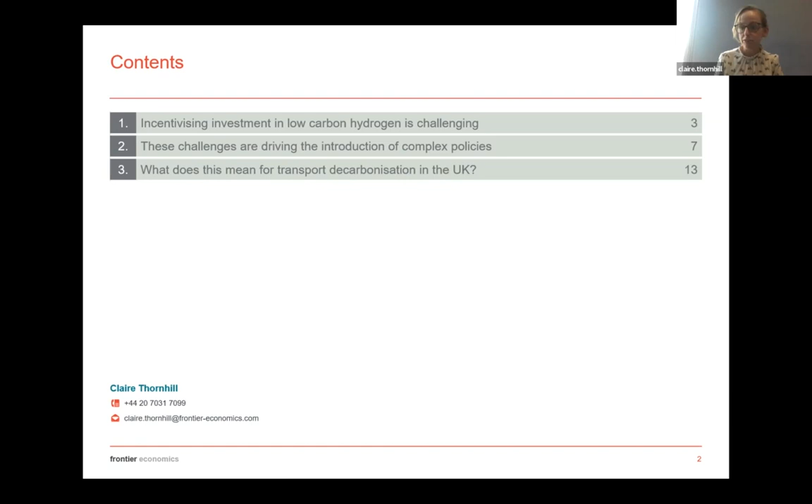So let's start with the ambitions. There are huge ambitions to deliver a low carbon hydrogen economy in the UK and in the EU. In the UK, there's a 2025 target to get a gigawatt of electrolytic hydrogen in place. And by 2030, there previously was a 5 gigawatt low carbon hydrogen target, but the recent British Energy Security Strategy doubles that to 10 gigawatts and also specifies that 5 gigawatts of this should be electrolytic hydrogen. And obviously this British Energy Security Strategy was written in the context of the current gas price crisis, which probably informs the emphasis change to electrolytic hydrogen.

And beyond 2030, there is an aim for large-scale deployment of hydrogen to reach all hard-to-decarbonise sectors. One thing I should mention, there's a big uncertainty in the UK around the role of hydrogen for heating in homes. That's something that we're working for BEIS on at the moment. So BEIS has a huge programme of research and technical research going on at present to inform a decision in 2026 about whether or the extent to which hydrogen makes sense as a low carbon fuel for heating buildings. But there is a really strong consensus that hydrogen will be required in certain sectors like heavy industry.

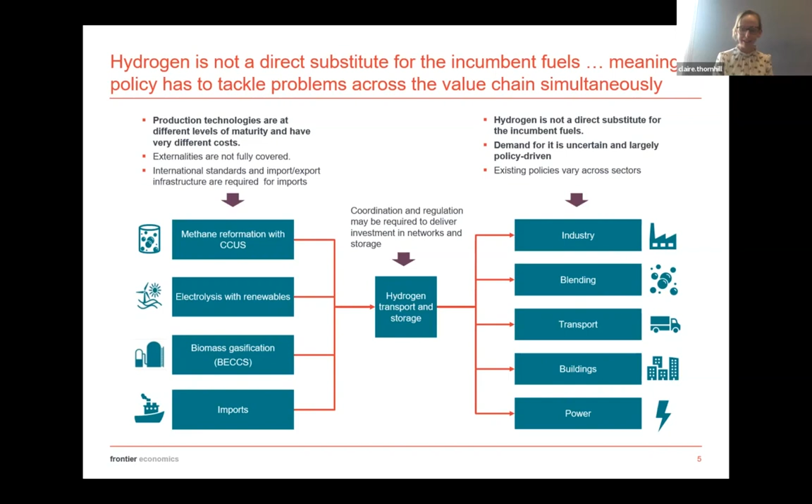So what does that mean? It means that generally when economists think about trying to get a low carbon energy market in place, we will start off with thinking about what the efficient end state would be. And here we would think, looking at the right, that we would have a market where there are no subsidies and the only intervention is to internalize externalities, for example, with the carbon price. But we're so far away from that at present. There's a lot more barriers and market failures in place.

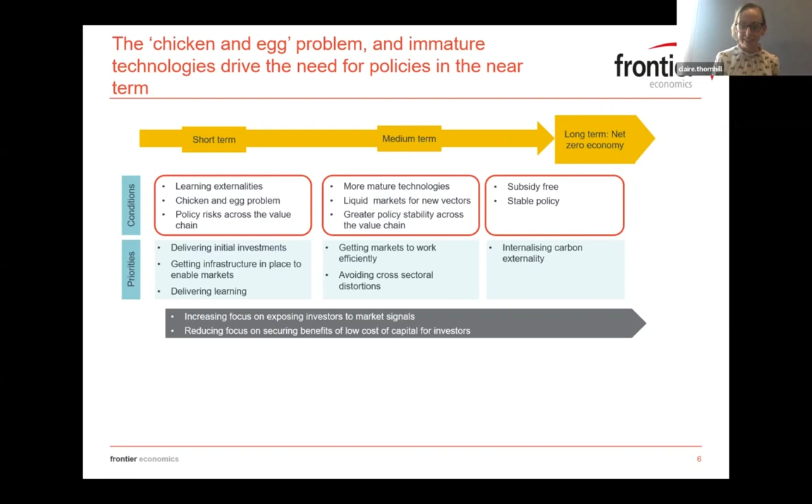So in the short term, we're in a world where there's learning externalities, there's the chicken and egg problem that I mentioned, there's policy risks across the value chain. Therefore, the priority has been in developing policies in getting initial investments off the ground, getting infrastructure in place to enable the markets and delivering learning. And that means, as we'll go on to talk about, that policies have tended to be complex and also slightly imperfect in places. And I think there's learning on the policy making side as well as in other areas of the market. So these challenges are driving the introduction of complex policies.

So looking just at three countries, as I mentioned, the UK, Germany, and the Netherlands, what we have seen is that unlike in the world of renewable electricity, where a sort of broad consensus around production subsidies has emerged, there isn't yet a consensus in Europe on the best instruments to incentivize low carbon hydrogen beyond R&D funding, which all countries are engaged in. And that means that not only are there very different subsidies across countries, there's actually a mix of subsidies within countries. And I think that reflects this multiplicity of market failures and barriers that are in place. It's very hard to design one all singing, all dancing policy that corrects for all of those.

So on the production subsidy side, the UK has announced a variable subsidy, which is originally aimed at delivering large-scale production of hydrogen for industry, and also a capital grant scheme, which is initially focused on electrolytic projects. And I'll go on to talk a bit more about both of those in a moment. The Netherlands has introduced a carbon CFD scheme. So that is a top-up payment against the carbon price, so that investors have certainty over the revenue that they can potentially receive in the carbon market. And the Netherlands also has investment support for electrolyzers.

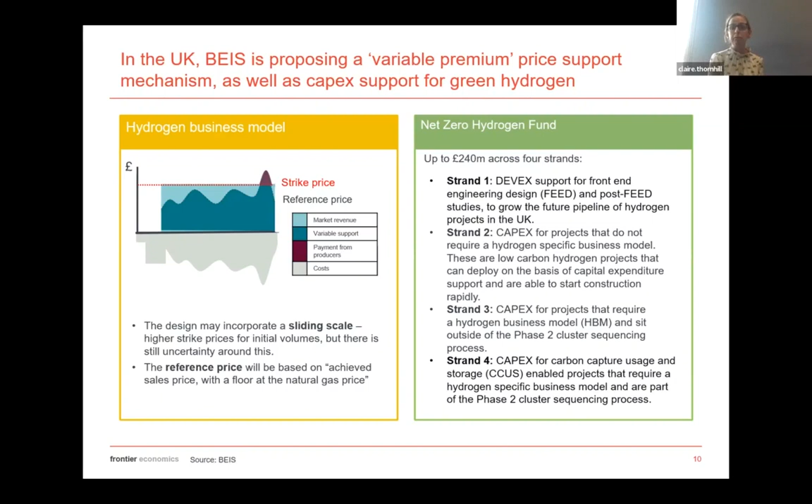So I mentioned also the renewable transport fuel obligation. That also, in theory, incentivizes hydrogen. The RTFO is a tradable obligation scheme, and hydrogen produced by electrolysis using renewable electricity or from biohydrogen can receive support from this scheme. Basically the obligation applies to suppliers of fuels to transport, including maritime and rail now.

And there are two parts to the obligation, and one of the parts relates to development fuels, and hydrogen is one of the fuels that's allowed to meet that obligation. But actually, looking at the 2022 renewable fuel statistics that have been published to date, it seems that no hydrogen so far has been used to meet those development fuel obligations. It has mainly been fuels derived from waste that have been used to meet that part of the obligation.

So why has the RTFO been slow to incentivize hydrogen so far? One is the point that I mentioned previously, that the RTFO is an obligation scheme. Investors have often pointed out that these obligations are hard to bank against, given the risk that governments will change the parameters, change the size of the obligation, change the buyout price, and so forth. And in fact, that's something that we've seen quite recently.

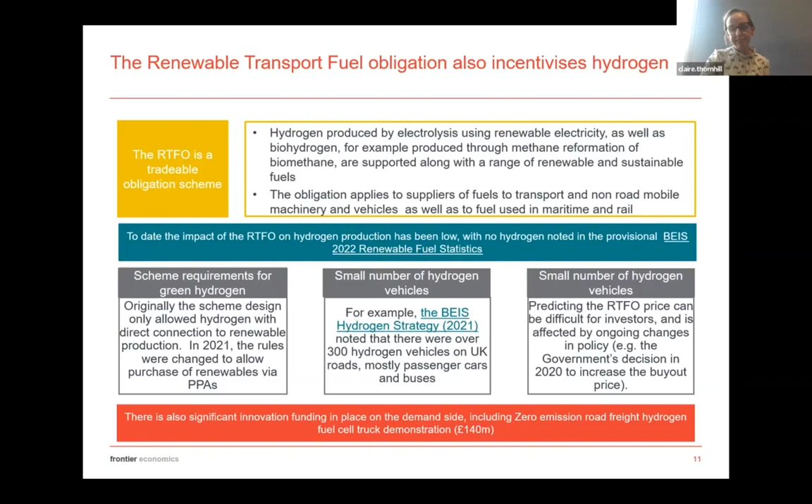So worth also mentioning that there's innovation funding in place on the demand side in the transport sector in the UK. Just to mention on the import side, I touched on this earlier, but there's some really interesting developments in Germany on imports. Germany envisages that the majority of its hydrogen will come from imports. Germany is focused on green hydrogen and has set up something called H2 Global. This is basically an organization that will buy and sell imported low carbon gas, and there will be a kind of CFD approach where the difference between the supply prices and the demand prices will be compensated by grants from the German government.

And this is quite exciting, I think, because there's a really strong green hydrogen production potential in countries with great renewables. So people talk about Morocco, Chile, places like that. It will be interesting to see what H2 Global does to that market.

So just to circle back and conclude, what does all of this mean for transport decarbonisation in the UK? Worth saying that BEIS expect transport to be a major user of hydrogen. The idea is that in the 2020s, before the refueling network is up and running, the main focus will be on depot-based transport, which could include buses. In the 2030s, there could be an expansion to HGVs, buses and rail, and also the potential for use in commercial shipping and aviation. And then, of course, there's just huge uncertainty about what happens in the long term. But there are still many open questions around this.

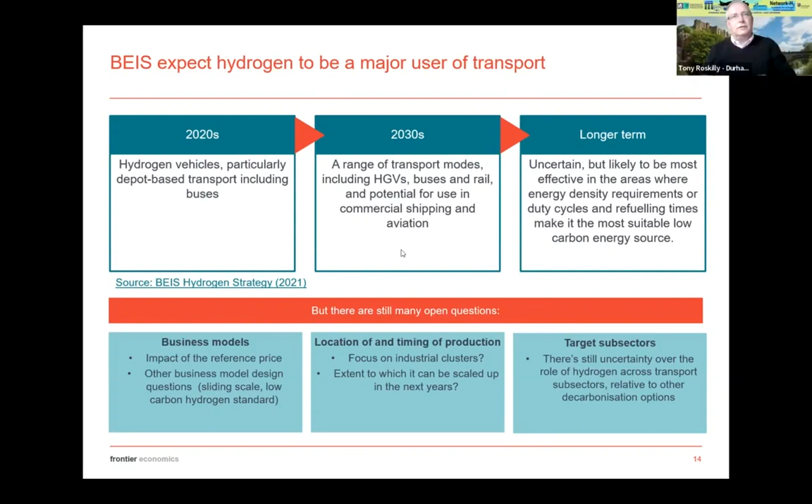Our next presentation is on a business model design for hydrogen refueling stations, a multi-level game approach. Tian Zhao is from Copenhagen Business School. He's a PhD candidate. Previously to his studies here on energy economics and policy he was at Beihang University in China. He has already published a number of papers on the economic and policy impacts of climate change, specializing in the application of game theory. Over to you, Tian.

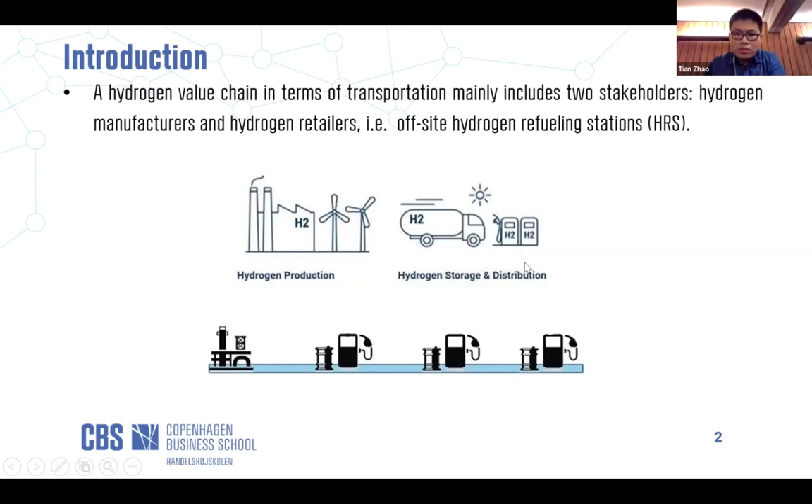The background is a hydrogen value chain in terms of transportation, which mainly includes two stakeholders: the hydrogen manufacturer, either the centralized hydrogen production plant or decentralized on-site hydrogen refueling stations, and the other stakeholder is hydrogen retailers, that is off-site hydrogen refueling stations. After the hydrogen is produced, it will be transported to the demand side, the off-site hydrogen filling station, through trucks or through pipelines.

But we have two questions about this value chain, because there are two major actors, the hydrogen manufacturer and the hydrogen retailer. They can choose to operate their business separately, or they can choose to run their business jointly. So the first question is which business model is better to generate more profits for them? For the first question, we use the Stackelberg game and the cooperative game to respectively calculate their profits in the case of the separate operation business model and the joint operation business model. After the calculation, we can compare their profits and find that if they choose joint operation as a coalition, they can get more profits than with separate operation.

The second question is, if we have shown the joint operation business model is better, how to make the two actors really adopt this kind of strategy? Because joint operation will cause a kind of coordination cost, such as they need to make an agreement, they need to design a contract. It will cost communication cost, negotiation cost. So in terms of this cost, the two actors may hesitate to choose the optimal business model of joint operation. So the second question is how to promote this kind of business model being adopted.

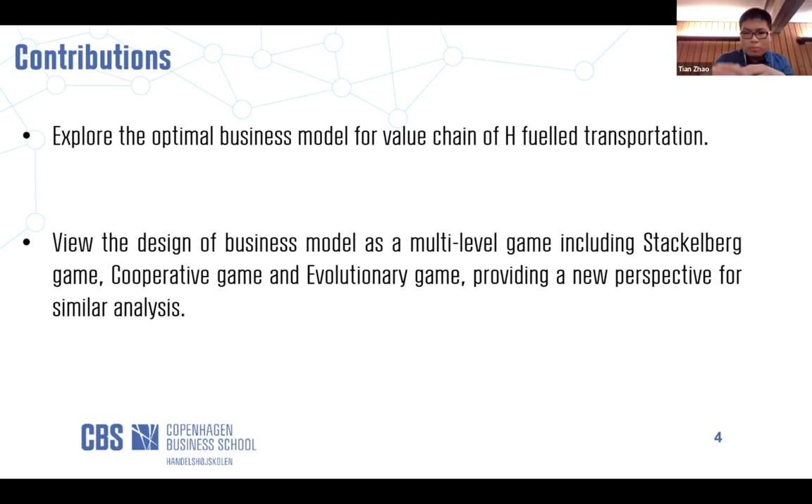So there are two major contributions. The first one is that we try to explore the optimal business model for the value chain of hydrogen fueled transportation. And the second one is we view the design of business model as a multi-level game, including Stackelberg game, cooperative game, and evolutionary game, providing a new perspective for similar analysis. Because previous research only used a one-level game or two-level game, but in our paper, we not only study how to find the optimal business model, but also how to make this optimal business model be adopted by the actors.

So we give some basic assumptions. We assume there are two major actors: one hydrogen manufacturer and one retailer, that is a hydrogen refueling station. The parameters used in this model are shown as follows. P is the retail price that consumers pay to the hydrogen refueling station. W is the wholesale price that the hydrogen refueling station pays to the hydrogen manufacturer. C is the production cost of hydrogen per kilogram. And Q is the demand of hydrogen from consumers.

And we also assume a linear demand curve, that is Q = A - BP, where A and B are constants. And as for the profit functions, if the two actors choose separate operation, they will get their maximum profits individually. So for the hydrogen manufacturer, its profit function is the wholesale price minus the cost of hydrogen production.

The first part means profit margin per kilogram, and we multiply the profit margin times Q, that is the total profit for the hydrogen manufacturer. For the hydrogen retailer, the hydrogen filling station, the P is the retail price. The retail price minus the wholesale price it should pay is the profit margin for the retailer, and we multiply the profit margin by its demand, and we get total profits for the hydrogen retailer.

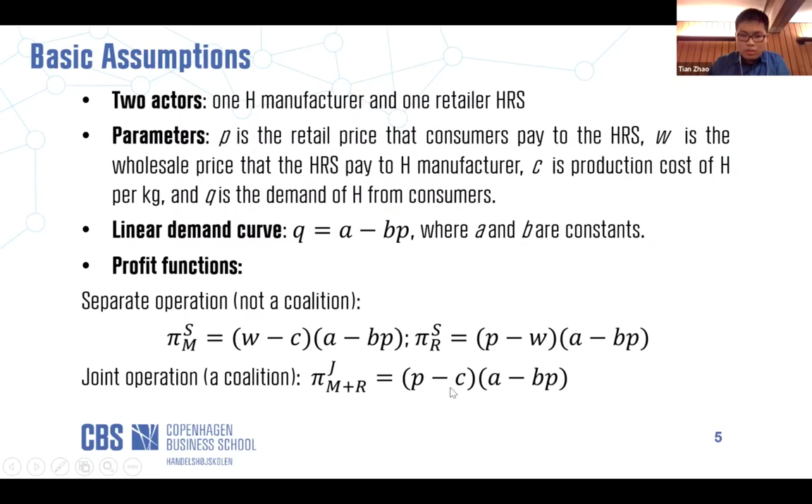And if they choose the business model of joint operation as a coalition, they will get a collective profit function. That is the retail price minus the cost of hydrogen times the demand. So we start the game with the business model of separate operation with the Stackelberg game.

Under this business model, the hydrogen manufacturer supplies hydrogen to a hydrogen refilling station as the leader because it determines its wholesale price first, and the hydrogen refilling station obtains the hydrogen and retails the hydrogen to consumers as a follower because it sets its retail price after observing the price set by the manufacturer.

The reason why we use the Stackelberg game for this case is because the Stackelberg game is a sequential leader-follower game in which the leader moves first and the follower moves after. They can decide their quantity or price, and they also maximize their own profits with no cooperation between them. So we use backward induction to solve this game, to obtain their respective maximum profits. And the profit maximization arises when the first-order derivative of profit functions with respect to price is zero.

Here we rewrite the profit function for the hydrogen manufacturer and hydrogen retailer again, because this is called backward induction. So we first calculate the first-order partial derivative of price in equation 2 and let this derivative be 0, and we get equation 3. And then for equation 1, we let the first-order partial derivative of the wholesale price be 0, and we get equation 4. So we combine equations 1 to 4, and with some easy calculations, we can finally get the maximum profits for the hydrogen manufacturer and hydrogen retailer, respectively, which are shown in equation 5 and equation 6.

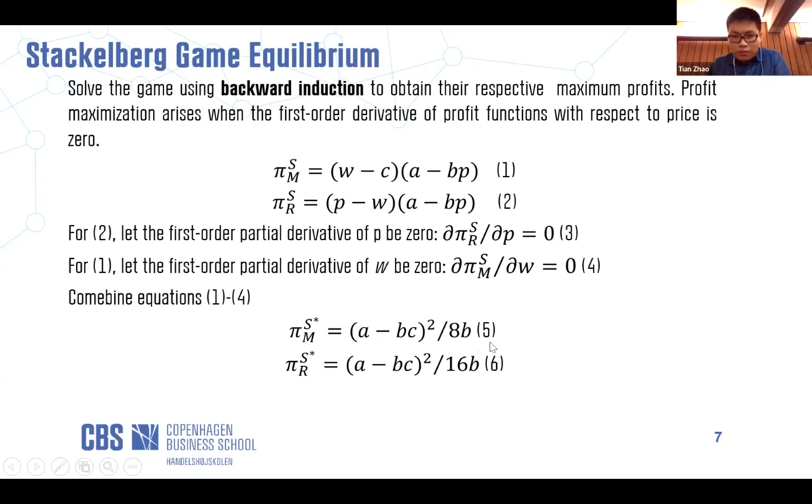And now we move on to the second game to study the joint operation business model with a cooperative game. In the case of the business model of joint operation, the hydrogen manufacturer and the hydrogen retailer are one coalition. They pursue the maximization of their collective profit. And we rewrite the profit function under the business model of joint operation again here. That is, we use the profit margin times the demand.

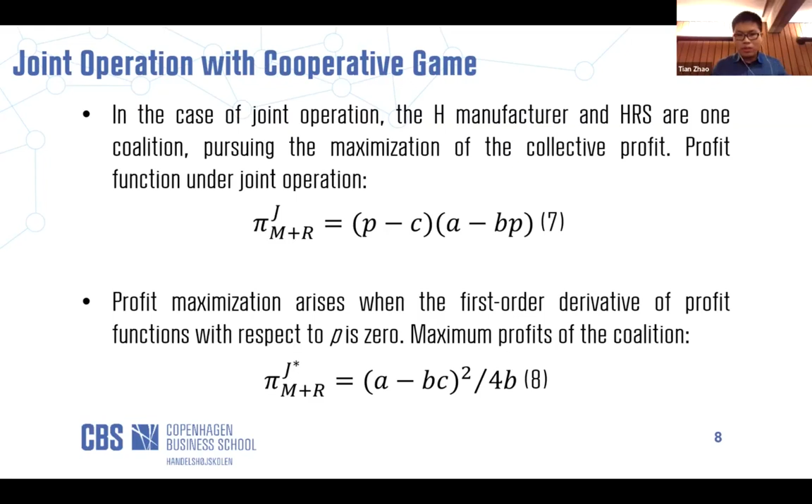Likewise, the profit maximization arises when the first-order derivative of the profit function with respect to price in equation 7 is zero, and we can also easily find the maximum profits of the coalition. That is shown in equation 8. Now we get the total collective profit for this coalition. Now, for the business model of joint operation, the members of the coalition can sign an agreement or a contract for allocation of this maximum collective profit between themselves.

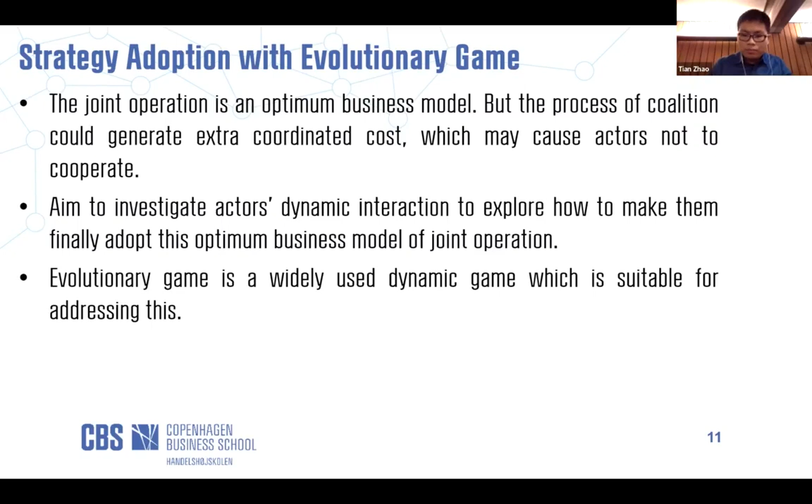So to solve this evolutionary game, we use the replicator dynamics. Because the time is limited, I will skip the details about how to solve this equilibrium. Finally, we can get two equilibriums. These two actors will both choose the business model of separate operation, or they will both choose the business model of joint operation. So this equilibrium of joint operation is the ideal equilibrium we want to get. So how to make this dynamic game converge to this ideal equilibrium?

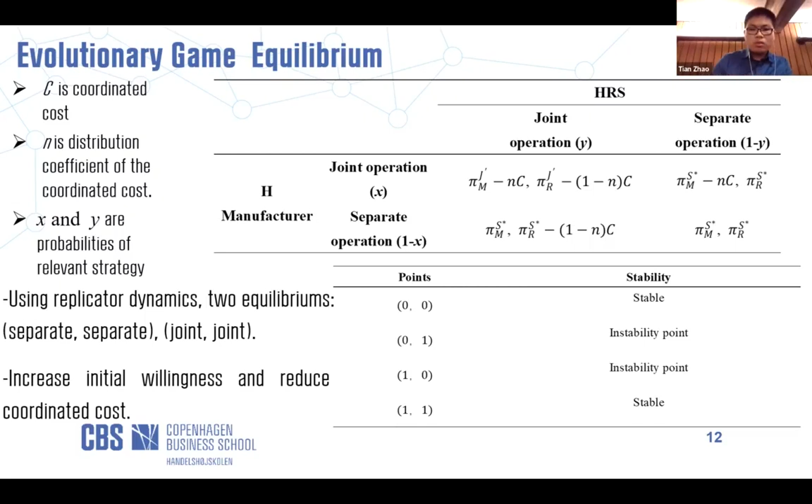So we move on to the conclusions and the outlook. In this working paper, we proposed a multi-level game framework for the design of a business model of hydrogen refueled transportation. And for the value chain of hydrogen refueled transportation, the optimal business model is the joint operation as a coalition compared with the separate operation as individuals. If we can decrease the coordinated cost, and if we can increase the initial willingness of operating jointly, we can lead the whole dynamic decision-making game to the ideal equilibrium.

But this working paper has some limitations for future study. The first one is we simplified the supply chain as one leader, one follower. That is, we assume there is one hydrogen manufacturer and one hydrogen filling station. But in reality, it can be one leader, that is one hydrogen manufacturer, and multiple followers with many hydrogen refilling stations. The hydrogen manufacture can be centralized or decentralized. In different scenarios, the profit function or the demand curve may be different.

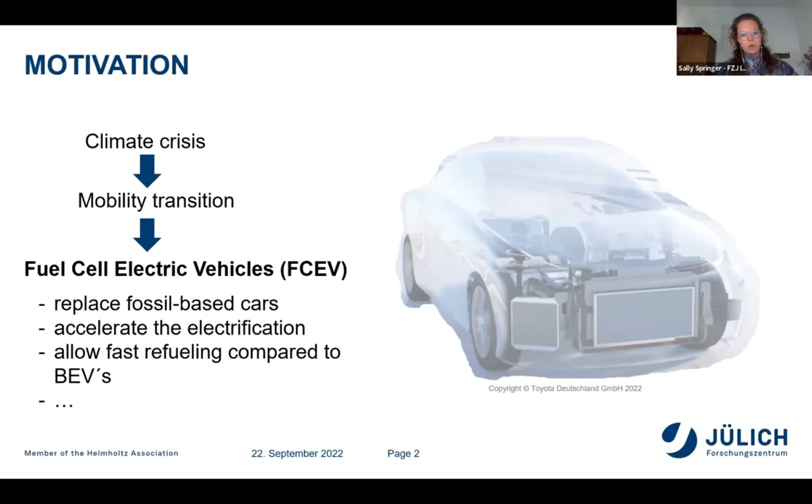But to name some of them, they can replace fossil-based cars, of course. They can accelerate electrification. They are faster in refueling, and so on. But we asked ourselves, what about the social impacts? Because these social influences and social aspects are one inherent part of sustainability, and it's really important that we don't forget about them.

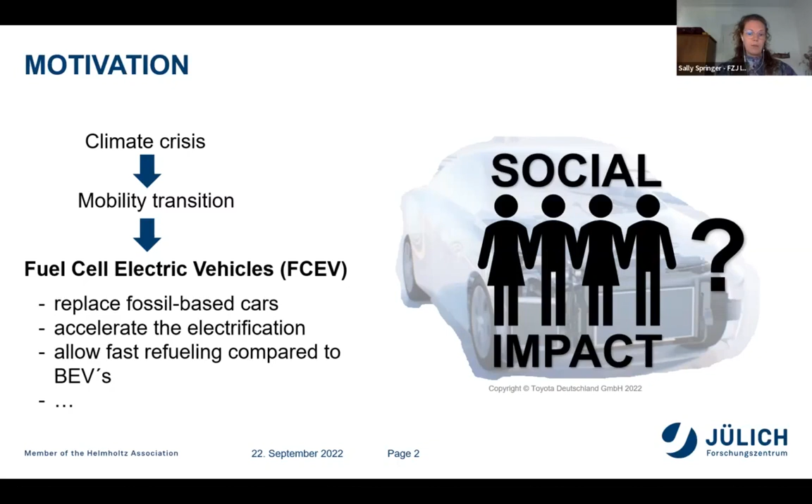So the presentation today is structured like this. In the beginning, I will provide some technical information about the fuel cell electric vehicle we looked at in our case study. And after that, I will talk about the methodology of social life cycle assessment. After that, I'm going to present the results, the social impacts, and in the end, a short summary, some limitations, and some future research needs.

Now, I've mentioned this method of social life cycle assessment, and to give you a hint about what it is, first of all, we can ask what does life cycle mean? So it's a life cycle thinking approach, and this means that the whole life cycle of, for example, a product is considered, starting with the raw material extraction from either primary or secondary sources. Then the next phase is the processing and production, which usually consists of different steps.

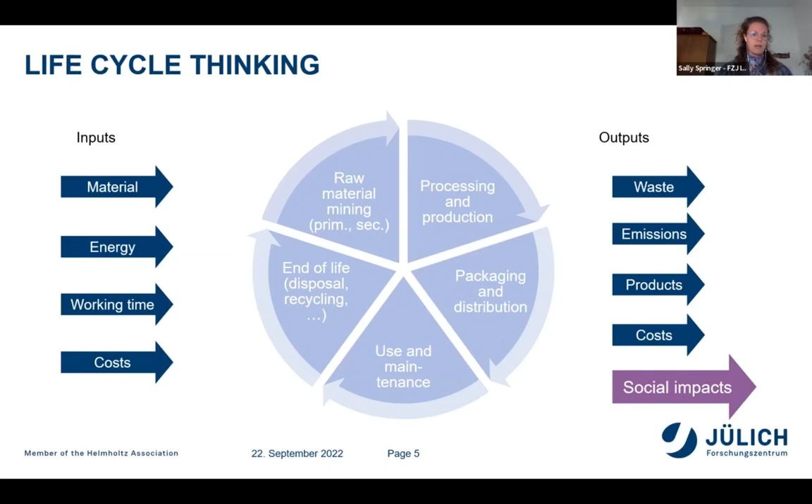And then at the same time, at every step of the life cycle, I have outputs. This is in the end, of course, my final product, but also intermediate products. But then next to them, I also have outputs like waste and emissions. I have my costs and I have social impacts on different kinds of people. So now we know what this life cycle thinking is about.

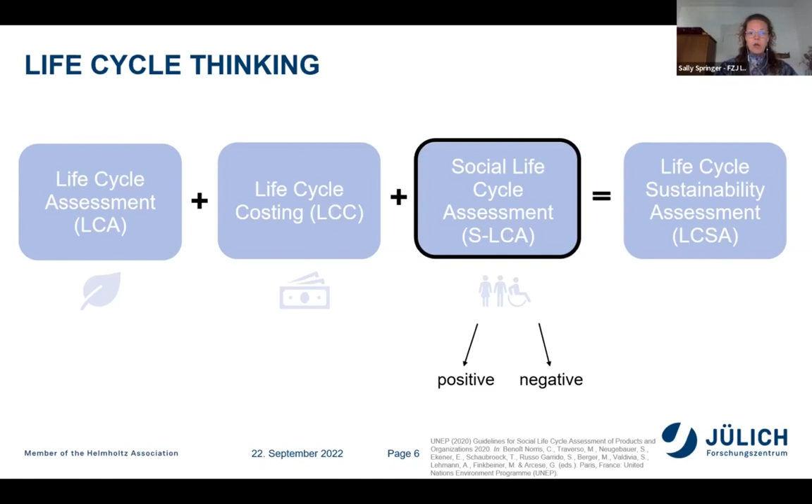And to put it in a greater context, in the end, I could always do a life cycle sustainability assessment covering all three pillars of sustainability, of which one is life cycle assessment, which addresses the environment and the ecological part. Then I have life cycle costing, addressing the economic issues. And then I have social life cycle assessment, what I looked at now, which covers all the social aspects. And these social aspects can either be positive in terms of opportunities, or they can be negative in terms of risk.

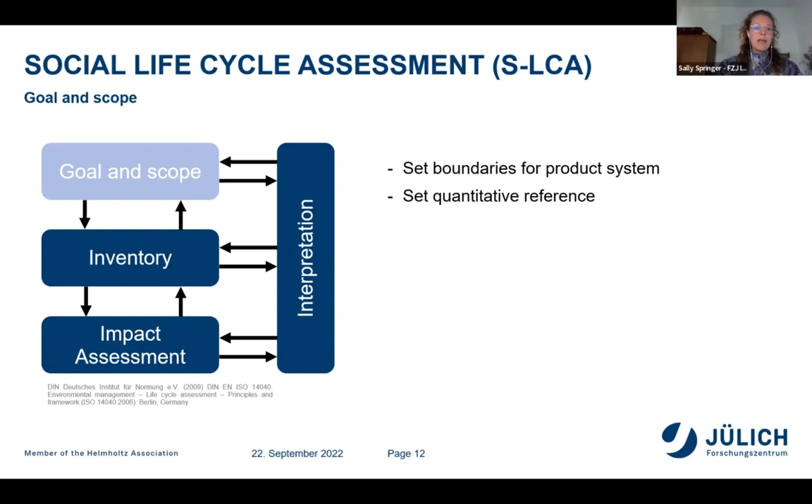Now, in the goal and scope phase, again, there are other things which have to be defined. For example, the boundaries for the product system have to be set, and you have to set a quantitative reference. This quantitative reference is called functional unit, and in this case, it is the production of a fuel cell electric vehicle with a 100 kilowatt proton exchange membrane fuel cell. So this is the reference for the whole calculation.

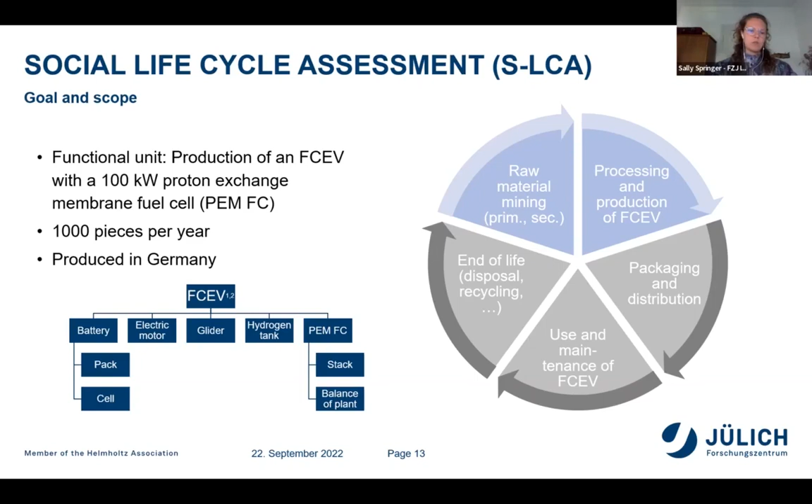And we assumed a production volume of 1,000 pieces per year, and the main manufacturing country being Germany. This means that the components, which you can see over there, are produced in Germany, but the supply chain comes from all over the world and from different countries. The life cycle stages we have considered were the raw material mining and the processing and production phase. This was mainly due to constraints on data availability.

So the next phase is the inventory in the social life cycle assessment. And this is basically all about the data. And this data can either be quantitative, semi-quantitative, or qualitative. And if it is qualitative, it has to be translated in semi-quantitative or quantitative terms in order to calculate it. And the data can either be site-specific, coming from a company, for example, or it can be generic data, and generic data is provided by different databases, and usually the data is on the level of processes, sectors, and divided into different locations, in this case, countries.

And in our specific case now, as I've mentioned before, we have used a generic database called PSILCA, and this database is built on another database, which is called EORA, and this is a global multi-regional input-output database, which actually uses economic values. So this is where the whole data came from.

Now, the next phase is the impact assessment in the methodology. And we have used a reference scale approach to calculate the results. And I will explain that on the next slide. But to stay here for a moment, in that approach, the calculation is based on risk levels and characterization factors. So for each risk level, I have this factor which serves as a weight. And in this case, the higher the risk gets, the more weight is put into the calculation.

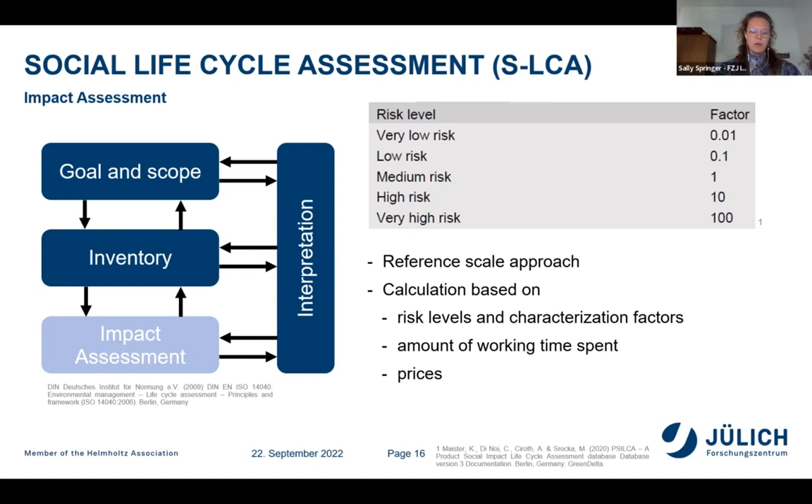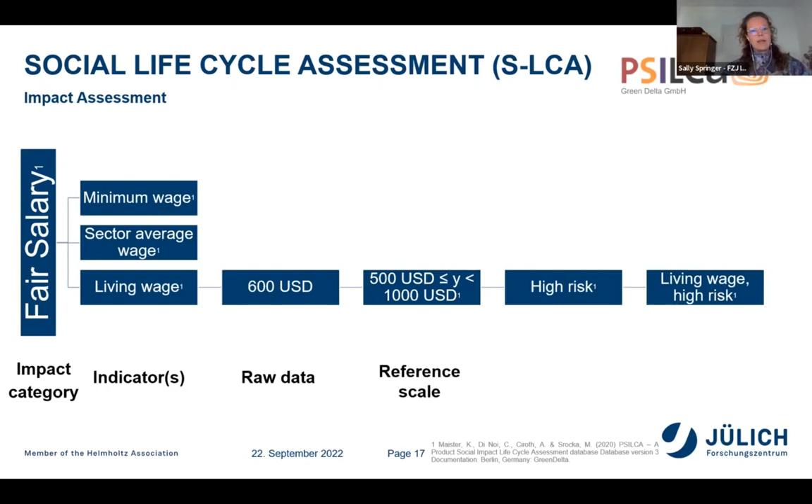Now, what is the reference scale approach and what does it mean? As I said before, we have different kinds of impact categories, for example, fair salary. And then I can have one or more indicators to measure that impact category. And for each indicator, I have raw data, for example, $600. But now I don't really know if this is a good performance or not, or if this is high or low. And this is why I can use a reference scale, for example, this one, which is provided by PSILCA as well. And now I can see that 600 has a high risk.

So this means there is a high risk of not meeting the living wage. And what I have in the end is a risk assessed indicator, which goes with that specific characterization factor, which we have seen before, into the calculation. Now the last phase, or the fourth phase, is the interpretation of the results. And this is what I'm going to do now.

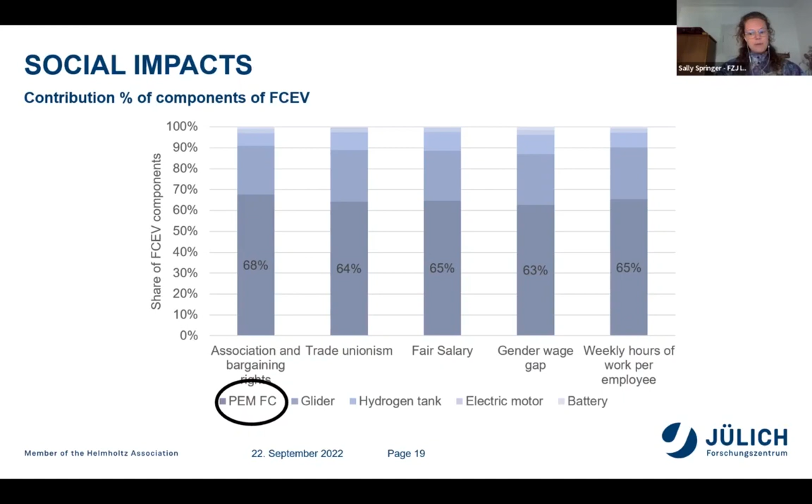So the results of our study were that if we look at the fuel cell electric vehicle as a whole, we can see now that the PEM fuel cell contributes most of the risk. And this is true for all 5 impact categories. So the highest risk stems from the PEM fuel cell. Now, with the help of that, we could identify our first hotspot here. And knowing that, we have deepened the analysis and looked at the PEM fuel cell now with a deeper look.

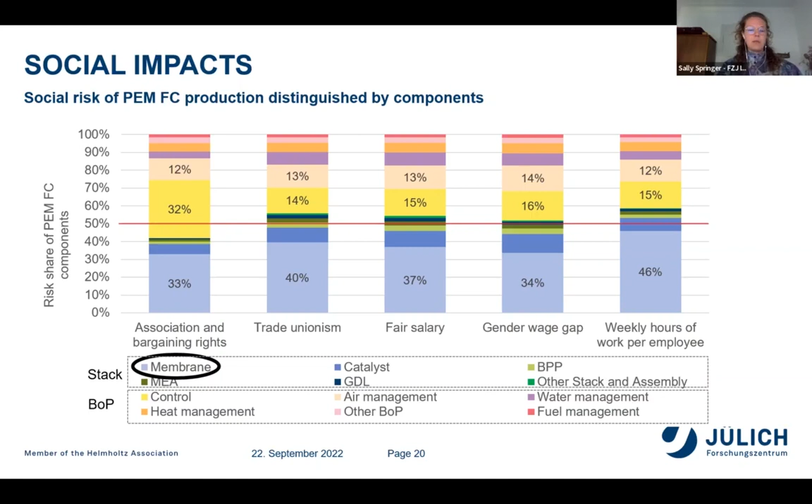And what we can also see is that the membrane accounts for the highest risk share across all impact categories. So the membrane is one major hotspot when we look at the PEM fuel cell. And what we can also see here is that the control in the balance of plant for association and bargaining rights also has a high risk share. Membrane seems to be the major hotspot.

And we can ask ourselves now why this is the case, because we are looking at working conditions, and Germany has a strong employment law and also strong law enforcement. So we now have to find out why the risk levels are so high in Germany. And I want to give you an example for that, which is fair salary. As we have seen before, we use 3 different indicators to calculate that impact category.

And one is the minimum wage, for which we have a very low risk. Because in Germany, there's this law that you have to pay the minimum wage, and companies are forced to do it. And it's not a big issue. We have a very low risk here. And then the second indicator is the sector average wage, for which we also have a very low risk, because the wage is in line with the sector average.

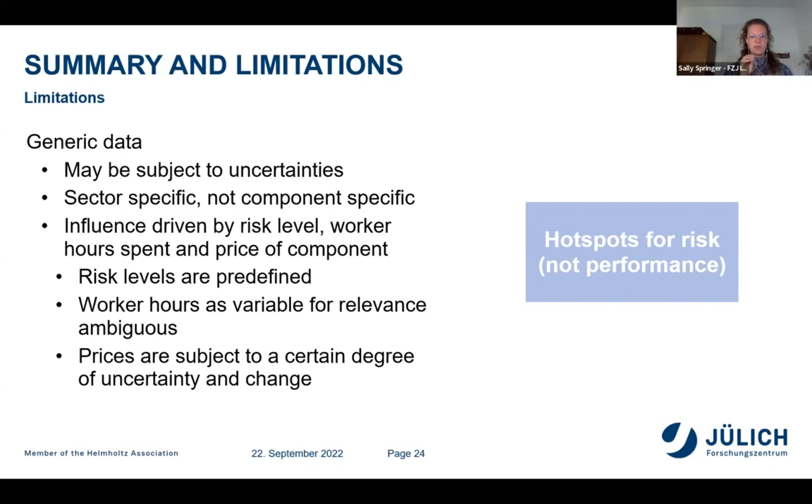And then the third point is with the prices, because they are subject to changes and also to uncertainty. So we have to keep all of that in mind. And with that knowledge, we now know that with generic data and that methodology of social life cycle assessment, we cannot measure an actual performance of a product, but we can identify hotspots for risk. And this is really important because usually the product system and products and product steps and countries and supply chains are so complex. It's a really good starting point to have these hotspots now and to gain deeper knowledge about them. And this is what we did here.

With the help of that methodology, we know now that for a fuel cell electric vehicle, the PEM fuel cell is one major hotspot. And inside the fuel cell, we have the membrane and also the control, which are hotspot components. What we also know now is that Germany is a major hotspot here for 3 out of 5 impact categories, and also that China bears a lot of risk for association and bargaining rights.

Now, for the future, it is really important to take these results and do broad literature research to find out more about the data quality. Where is the data coming from? How old is the data? How reliable is it? And then in a second step, look at the indicators and find out if they can really measure what I want to know. And then I have to gain knowledge about maybe special characteristics of a sector, if there is anything I need to know and understand in order to interpret the results in the right way.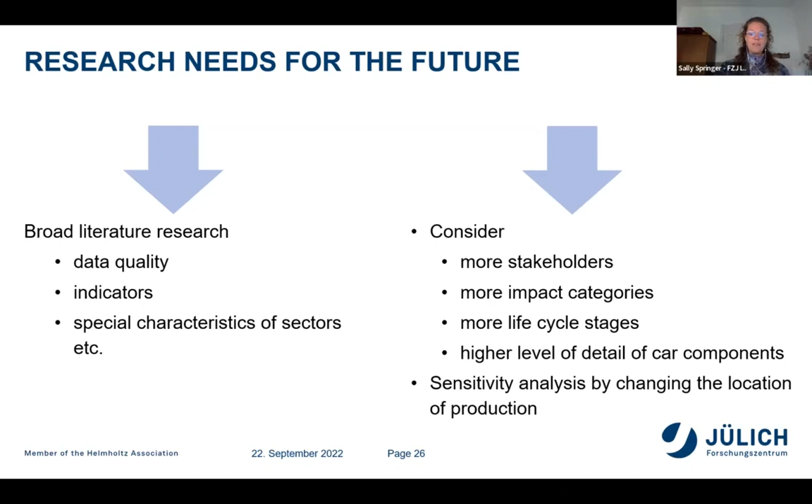And then, of course, it would be really interesting to consider even more stakeholder groups, and with that more impact categories and more life cycle stages. In this case, it would be really interesting to use site-specific data, of course. With the help of that, we could also increase the level of detail of the car components and make a deeper analysis. And then it is really important to make a sensitivity analysis in different terms, for example by changing the location of production, but also regarding the underlying data and the sectors we have chosen for the calculation. So I hope I could shed some light on the social aspects of fuel cell electric vehicles.

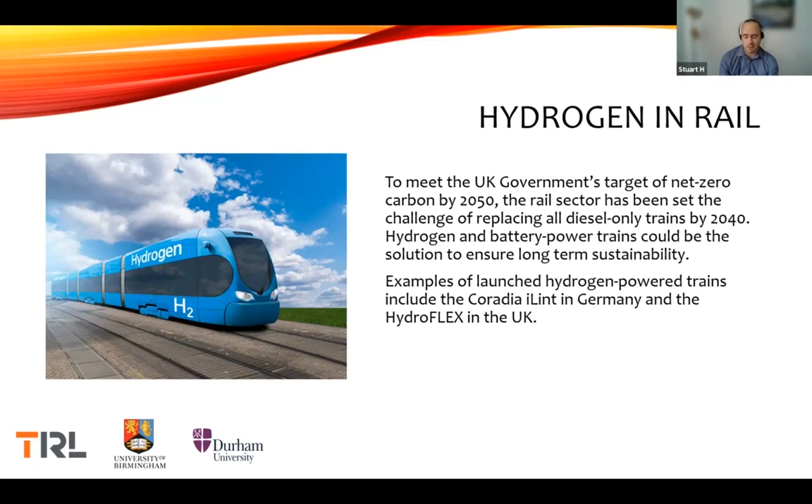So this is moving rapidly. Indeed, 4 years ago, when this event was last held, there was a lot lower interest in hydrogen. And certainly issues like decarbonisation weren't at the forefront, but that's certainly changed now, and I expect in coming years it will just accelerate even further.

So the work we've done at the university previously, this is probably what we're most famous for at the minute, is the work we've done on the Hydroflex train. So here we see an existing train that had a new traction system developed by my team in partnership with Porterbrook, and we installed a fuel cell battery system into this train. And so we did the engineering work, but also the approvals work in order to get the vehicle running onto the main line, and that's what I'm going to tell you about shortly.

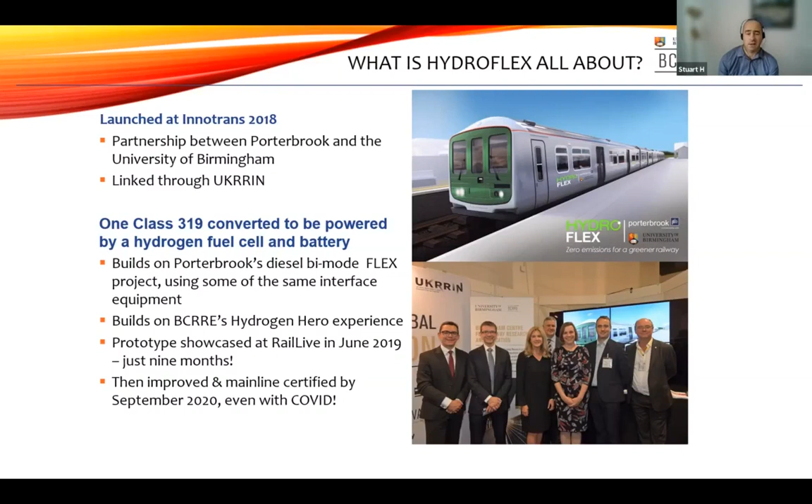So that project was launched at the last InnoTrans, which was in 2018, so pretty much four years ago. And it's a partnership between ourselves at the University and Porterbrook. It was an existing train that we took and converted it to hydrogen to demonstrate that we could do it. So I've got some slides on the Hydroflex train itself. So it was the first full-size hydrogen-powered train.

I've got full-size in brackets there because my team at the university had developed a narrow-gauge locomotive back in 2012 and showcased that. And actually, the little train that we developed back then kind of captured the imagination of the rail industry, and they realized that actually you could do this at a full scale as well. We did a lot of work on disseminating and demystifying the technology before we translated it into mainline scale.

So the work involved converting an existing train, the first ever 319 train, 319001. It had already done 2.5 million miles, so it was kind of retired, and then we unretired it and brought it back to life and converted it into a hydrogen train.

One thing to note, which is interesting about rail vehicles, is because they have such a long life, it's quite common for a vehicle to get overhauled and refreshed throughout its life. New interiors, new traction systems, new equipment, and so on and so forth. So what we're doing is not out of the ordinary. It's quite common for rail vehicles to get that massive engineering overhaul.

Another key thing is these vehicles have already got an electric traction system, so we were able to interface the fuel cell battery system into the existing DC link on the train, which made our lives a bit easier. So lots of electric rail vehicles that already exist and may be close to retirement could be good candidates to get converted to hydrogen and extend their useful life by making them an autonomous vehicle.

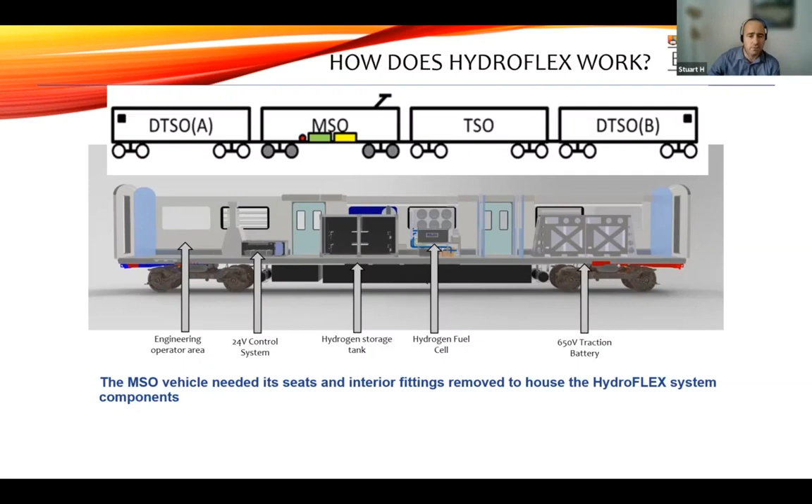So there's some pictures of the inside of the train, and this does relate to standards here. The train has been designed to meet various structural integrity standards. So here you can see we took the seats out of the train, and the seats are actually attached to the train with very strong mounting points. So the rails in the floor that the seats are attached to are very strong.

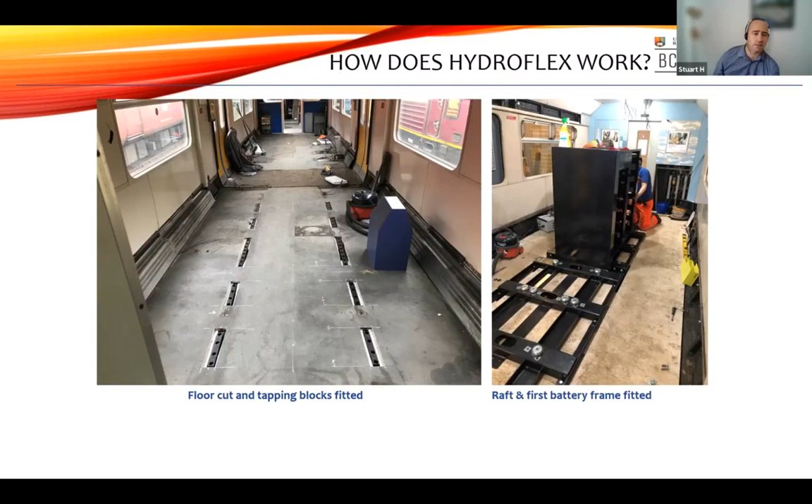Having said that, we used those fittings, but had to interface various rafts and other mechanical devices to ensure that all the equipment was attached to the train in such a way that it would meet the relevant standards. So you can see some of the frames and rafts that were created there. The tanks are 350 bar tanks, and here we designed it to EC79 standards using technology and standards adapted from the automotive sector. And here's the fuel cell.

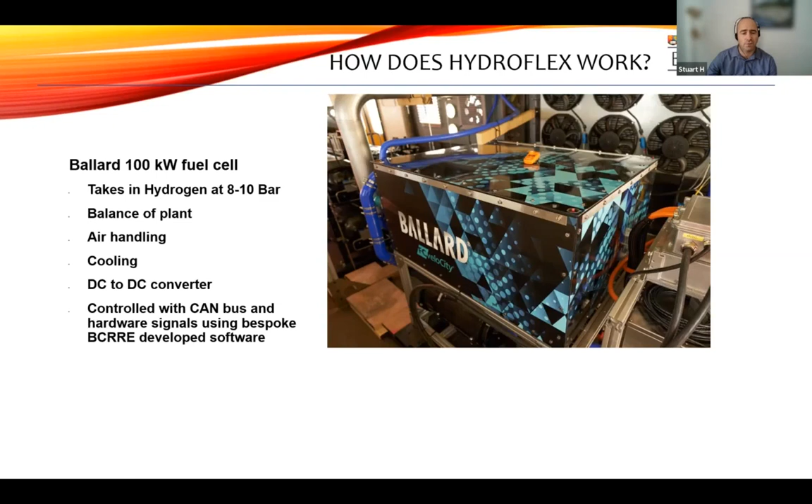So a fuel cell is just a box with hydrogen going in one end, and some balance of plant, air handling, cooling, DC to DC converter taking the electricity out of it, and controlled with CAN bus messages and some hardware signals that we wrote. We developed some electronics and software to run the fuel cell, to manage its power flow into the train system.

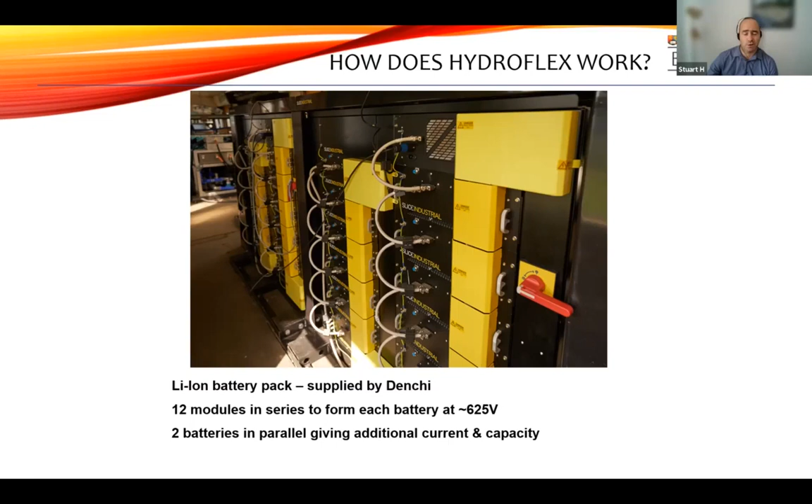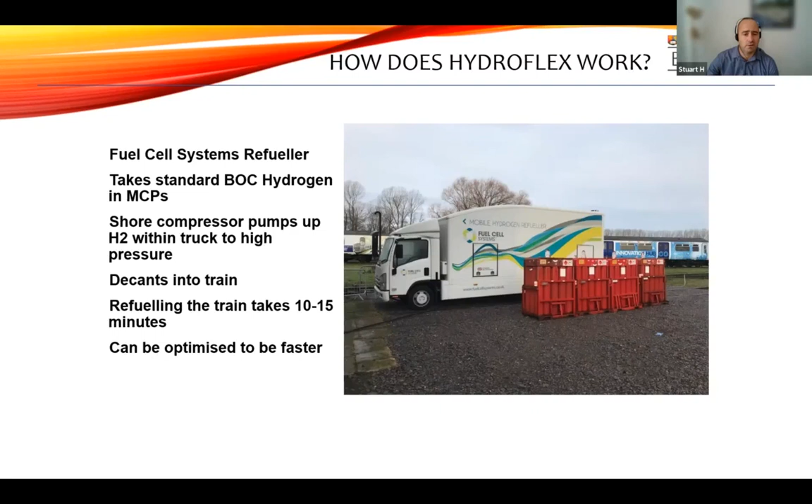So it's kind of independent then, in the sense that the dynamics of the power are all managed by the battery, and we just decide when we need to support the battery by charging it, and so on. So there's quite a lot of work gone into the architecture of this and the control system that I could tell you about.

So in terms of safety and standards, we use this thing called the Common Safety Method. It's basically a European standard for doing railway approvals, and allows you to make engineering changes to railway infrastructure and trains. We have an accredited body that does an independent assessment of it, and we also worked with the Office of Road and Rail, or Rail and Road, I never know which way around it is, who accepted our technical approach of using the Common Safety Method.

And that includes doing basic hazard identification, where you go through line by line of every single item of equipment and look at what hazards there might be, and then identify evidence to close out those hazards. So I would say actually doing the safety approvals work was harder than the engineering building the train. It took longer and was more expensive than the train engineering.

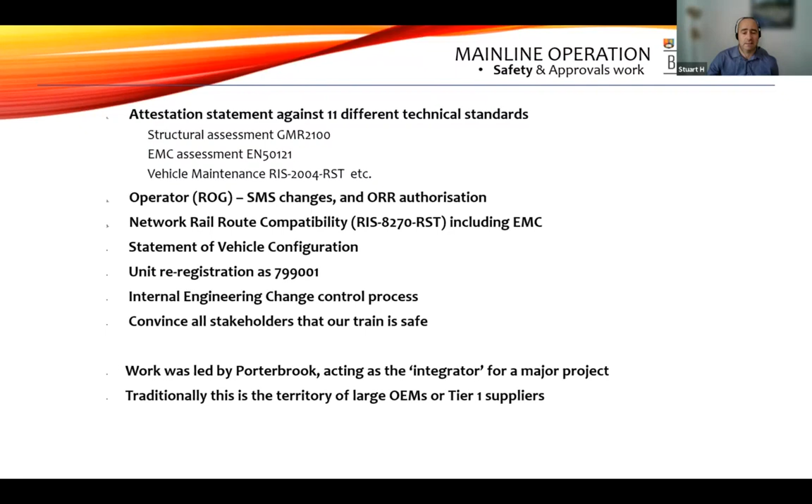So there's a huge amount of work involved in getting this onto the main line. It was led by Porterbrook because they own the vehicle, so they acted as the integrator, pulling all these pieces of work together.

Some pictures of the sort of standards that you need to comply with, electromagnetic compatibility standards for rail, and so on and so forth. So this is where we looked into this in more detail about how the existing railway standards would be affected by introduction of a fuel cell and so on. And in general, there weren't any showstoppers in terms of meeting existing railway standards with the adoption of a fuel cell propulsion system.

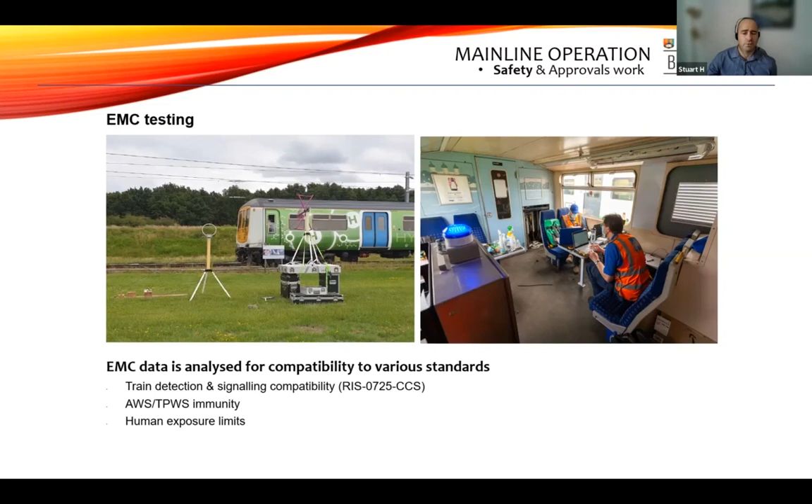So I think, as I said at the introduction, railways are advancing rapidly in terms of engineering. The standards are trying to keep up, but I'd say the engineering is happening quicker. There are standards being developed for rail specifically, but they're in draft form and proceeding at a slow pace, in my view. But that's the way standards go, I would say.

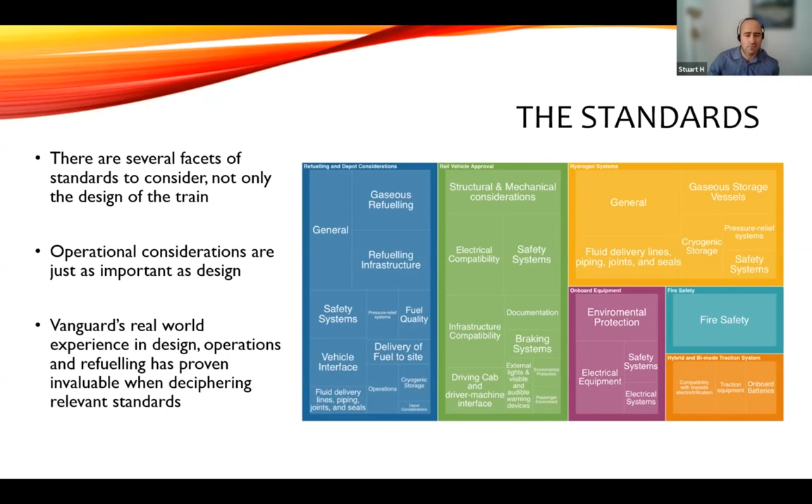As part of the work, we looked at a framework and mapping of existing standards, and we produced this standards landscape, and this is available on a website, and you can click on these buttons and then drill down into the various standards that you need to think about when you're doing fuel cell vehicles. And we're hoping to get this hosted on the Rail Safety and Standards Board's website in the future, because they were quite pleased in terms of how it could be useful for other people working in railway fuel cells to follow the method that we've used.

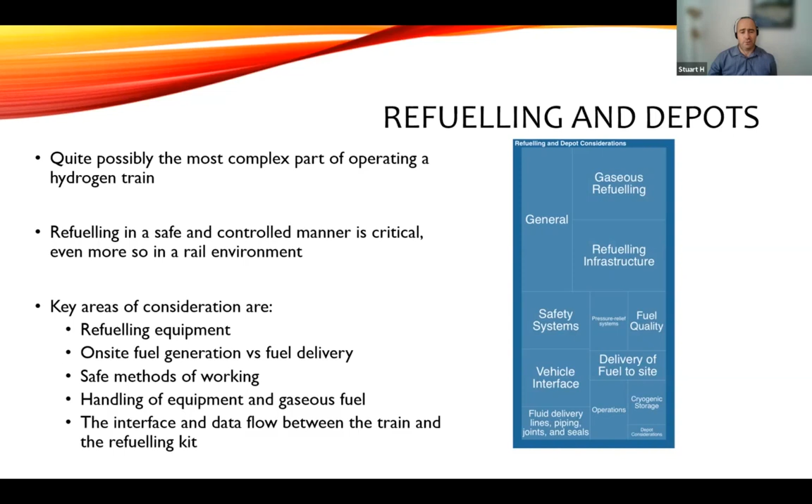And so that's broken down into things like refueling and depot arrangements, how we handle the fuel in terms of delivery, transporting it on trucks and so on, and then handling of the fuel and the interface with the train. So all these things are important. The vehicle is the thing we focused on heavily when we developed the train. So things like electromagnetic compatibility, structural integrity of the equipment, making sure that equipment can cope with the loading and vibration and acceleration environments that a train might throw at it.

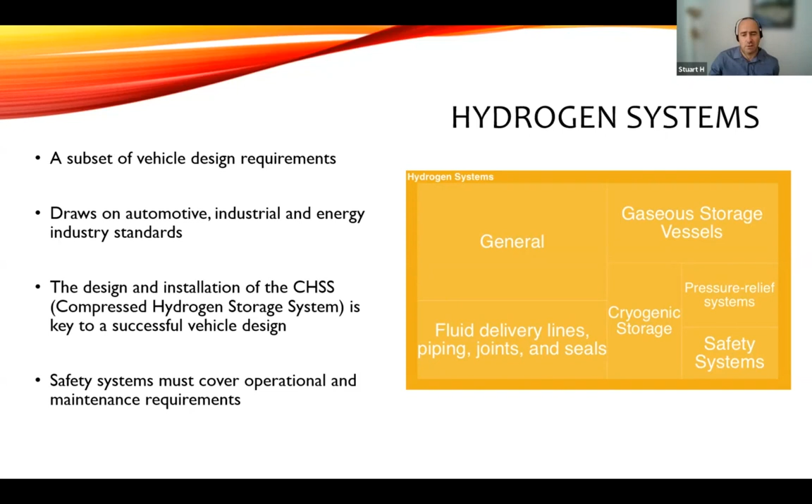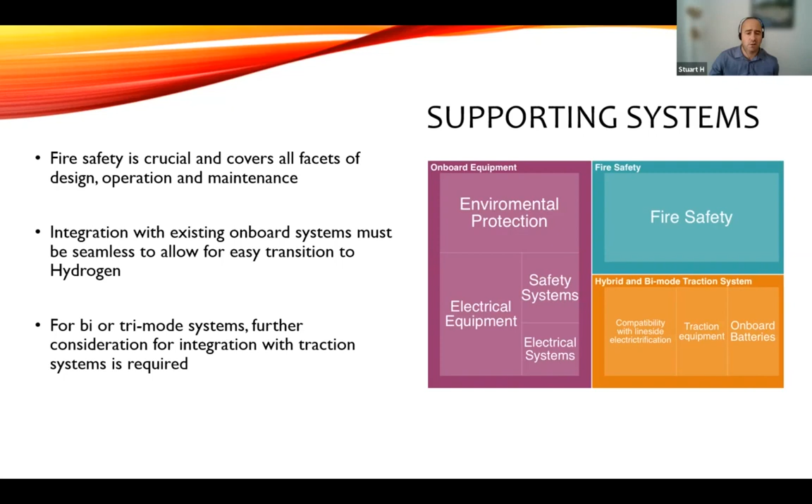And then things like hydrogen safety systems. Here we drew on automotive, industrial, and existing energy standards to install the hydrogen system in a rail environment. And then things like supporting systems, fire safety. This is a big issue. Integration with other onboard systems to allow easy transition to hydrogen, and how we integrate it with the existing propulsion system. So I just kind of had a canter through this.

I think the project was very useful because it allowed us to take a step back and look at the current understanding of hydrogen safety standards, how they've been applied to rail, and the work that we've done at the university, and also the likes of the Scottish hydrogen train, which has recently started running. They all have to go through the same pain really, to make sure we can do this safely.

I think we found out there's still some really big gaps, particularly over the infrastructure and how you manage trains, for instance, in covered environments. So taking trains through tunnels or taking them into underground stations, we really need to think about how we manage that going forward. There's an understanding of that, but I think we still need to work on understanding how we manage a rail vehicle traveling in a more enclosed environment.

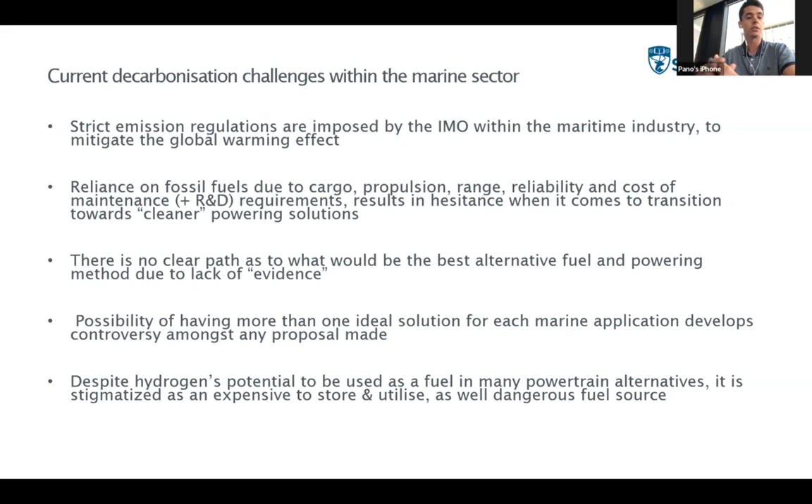And then there is also the possibility of having more than one ideal solution for each marine application, and that develops controversy amongst any proposal made. Finally, despite hydrogen's potential to be used as a fuel in many powertrain alternatives, it is stigmatized as an expensive to store and utilize fuel source, as well as quite dangerous to handle.

Consequently, the challenges that we face as a decarbonization research team are to minimize vessel emissions by eliminating their reliance on carbon-intensive sources, explore ways through which carbon could be used and traded around the world, investigate storage and utilization methods of liquid hydrogen on board vessels, compare that fuel alternative to other fueling alternatives, look into the possibility of long distance shipping with liquid hydrogen as fuel, and finally meet the clean maritime aim to become net zero by 2050.

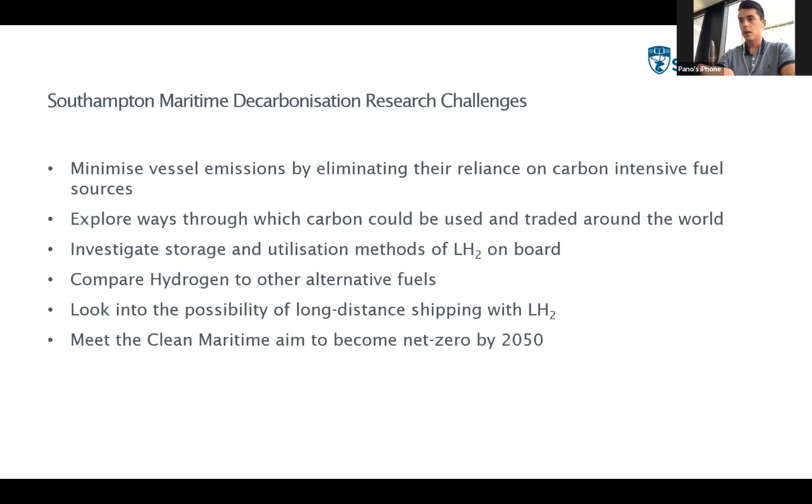Some examples of our recent work include the zero carbon baseload for large vessels and the ammonia marine-powered uncrewed surface vessel. Both projects were under the Clean Maritime demonstration competition and were funded by the Innovate UK fund. So other local projects that we carried out independently were the design of a liquid hydrogen carrier. We carried out a feasibility study of hydrogen fuel demand and distribution, with the case study being the Port of Southampton, quite local to us.

We have completed a lot of towing tank testings, fuel cell testings as well, and we've developed dynamic models of hybrid powertrains with fuel cells and batteries. So the first big project that we were involved in was the zero carbon baseload power for large ships. We've investigated the feasibility of replacing the LNG generator sets with smaller ones and adding solid oxide fuel cells to provide the hotel demand on board.

To do this, we developed a dynamic energy model, which included the fuel cell system itself, the batteries, and the generators to get the fuel consumption and emission benefits from it. Those models included the safe return to port requirements, a waste heat recovery system, and we've also examined the cold ironing alternative, which is basically a plug-in solution for vessels when they reach port. Of course, during the design process, we've looked into all of the safety requirements and risk assessments involved in undertaking such an action.

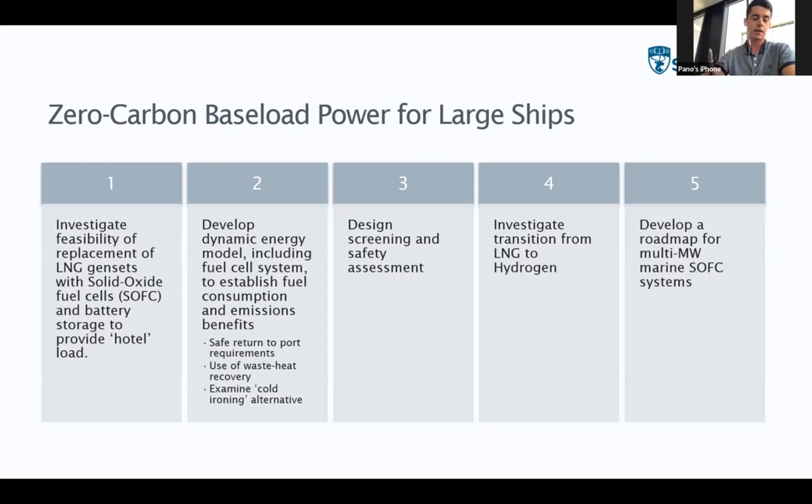More important to this presentation, we've investigated the transition from LNG to hydrogen, as many believe that LNG will be part of this moving on process. And finally, we developed a roadmap for multi-megawatt marine solid oxide fuel cell systems. So this is the vessel in question, the one that we based our analysis on.

Some of the partners involved in this project were Lloyd's Register, Ceres, the fuel cell manufacturer, Carnival, who provided us with all the data for the cruise ship in question, and Shell, who also provided part of the technical information when it came to accommodating that design on board. So the vessel in question has 62 megawatts of installed power. The average port load was estimated to be 9.2 megawatts with a max speed of 22 knots, propulsion power of 37 megawatts, and 6,600 passengers on board.

And the reason why I'm saying this is because it turns out that a big part of that load was in terms of heating, ventilation, and AC requirements. And to meet those requirements, we had to base this off a 10.5 megawatt solid oxide fuel cell system. That system would be powered from LNG, which would be internally reformed into hydrogen, and that would then later on be utilized by the solid oxide fuel cells.

Now, for this reforming to take place, a good thing about solid oxide fuel cells is their electrolytic structure, which requires them to operate at above 500 degrees Celsius. But there remains the question: do we really have enough heat for producing steam for many activities on board?

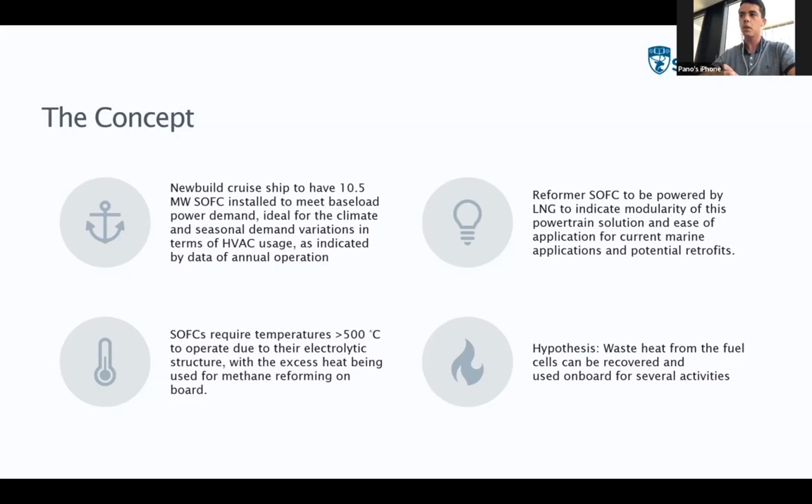So our hypothesis was that we could indeed recover that. So the system design, based again on the original general arrangement of the vessel, we added 10 more meters to accommodate that fuel cell powertrain on board, plus the batteries. So again, from the 4 big generators, we would substitute 2 of these into 2 smaller ones and keep the solid oxide fuel cells on board.

And the reason why we included batteries in the first place was to cope with the rapid changes in electrical demand on board, because the ramping up and down rate of the solid oxide fuel cells is much lower than that of the generators. So we had to take that into account.

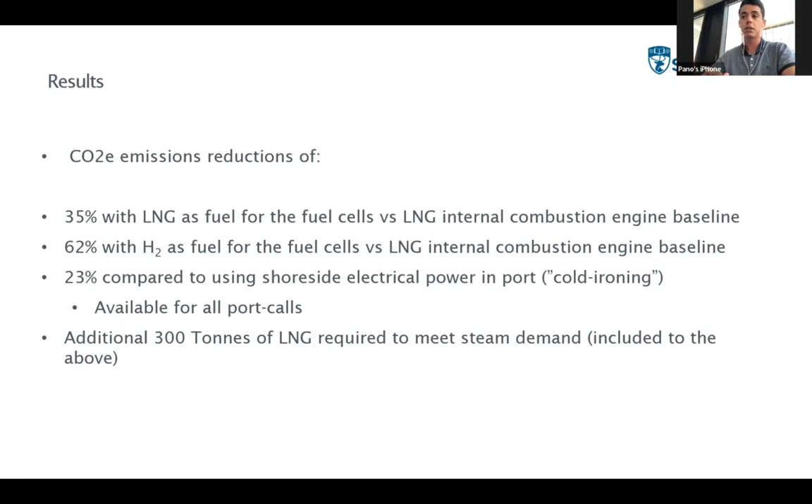The results of this project were, in terms of CO2 reduction, 35% reduction in CO2 emissions still when using LNG as fuel, 62% reduction in terms of CO2 emissions when using hydrogen, and 23% when using the cold ironing alternative. But still, there was not enough heat. So in all of these results, we included an additional 300 tons of LNG to meet that steam demand in terms of energy.

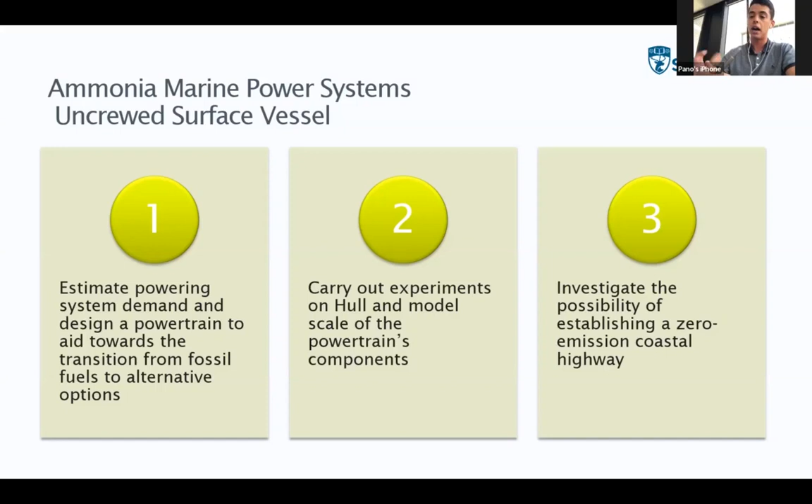Moving on to the next project, the ammonia marine powered vessel. Our tasks were to estimate the powering system demand and design a powertrain to aid towards the transition from fossil fuels to alternative options, one of them being, of course, hydrogen, as it ended up being. Then we would carry out some experiments on the hull at a model scale, as well as some of the powertrain's components. And finally, we would investigate the possibility of establishing a zero-emission coastal highway as a side activity of this project.

So the vessel that we based our project upon was the Armada class vessel, currently being used by Ocean Infinity, one of the partners of this project. And Oxgreen was the technology supplier in terms of the ammonia cracker, since this vessel would be powered by ammonia. A couple of specs as well: we were looking into a max speed of 15 knots and a propulsion power of 2.5 megawatts supplied by proton exchange membrane fuel cells.

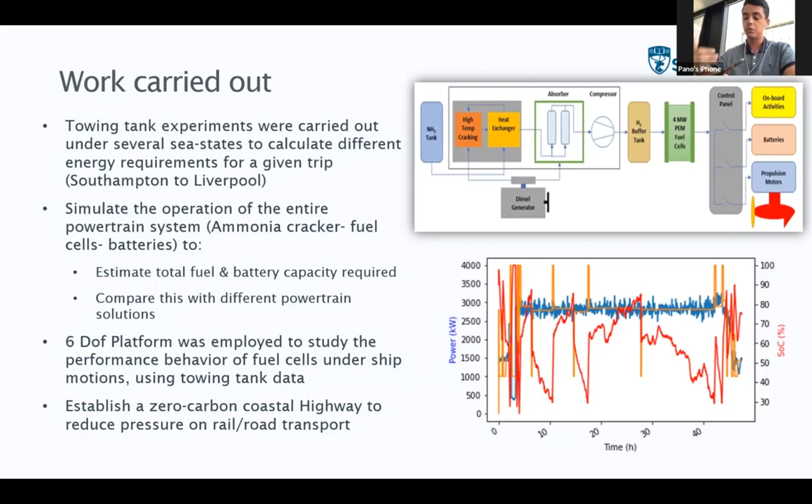A 6 degree of freedom platform was employed to study the performance behavior of those fuel cells when undergoing ship motion, based on the sea states that we gained from the towing tank experiments. And finally, combining all the results above, we managed to establish a zero carbon coastal highway as a way of reducing pressure on the rail and road transport.

So the results were that in terms of ammonia cracking energy requirements, 25% of the total installed power of the fuel cells would have to be taken away just to crack the ammonia into hydrogen to power the fuel cells. And hence we provided different alternatives, the main one being liquid hydrogen storage on board. It turned out to be a much better solution in terms of space and weight than the ammonia cracker and ammonia storage, and overall more efficient as well, as the energy requirements were nowhere near close.

Carrying on, the towing tank data indicated that there is a significant propulsion variation when going under heavy weather sea state conditions, and again, we required the batteries to cope with that. Finally, the potential of establishing a zero carbon coastal highway shows that there would be a reduction of 60% in emissions when it comes to transporting goods around the UK.

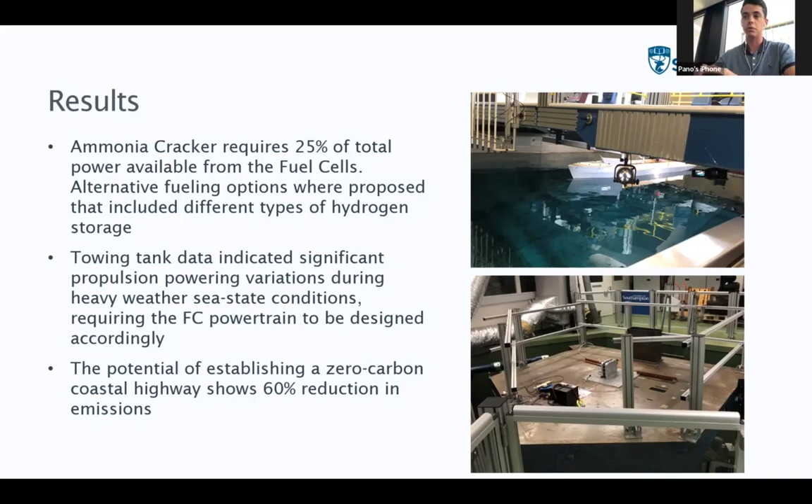Again, as part of local projects undertaken, there is the feasibility study of hydrogen fuel demand in the port of Southampton. Our aim in this study was to estimate the hydrogen fuel requirement in terms of bunkering for a given port, that being the port of Southampton. Hydrogen fuel energy would be translated in terms of megawatts of electrolysis required. And finally, a bunkering method would be proposed to cover that demand whilst in port for all vessels.

So the method that was used in this case, we sampled daily ship traffic of that port, and we used that sample to analyze and distinguish between different types of vessels and their characteristics, main ones being passenger capacity, cargo capacity, speed, and destination, so as to estimate the total energy requirements for each vessel. And then by doing this, we use the annual data that could provide us with each type of vessel that would go into and out of the port of Southampton to get a better picture of what would that mean in terms of total hydrogen energy requirements.

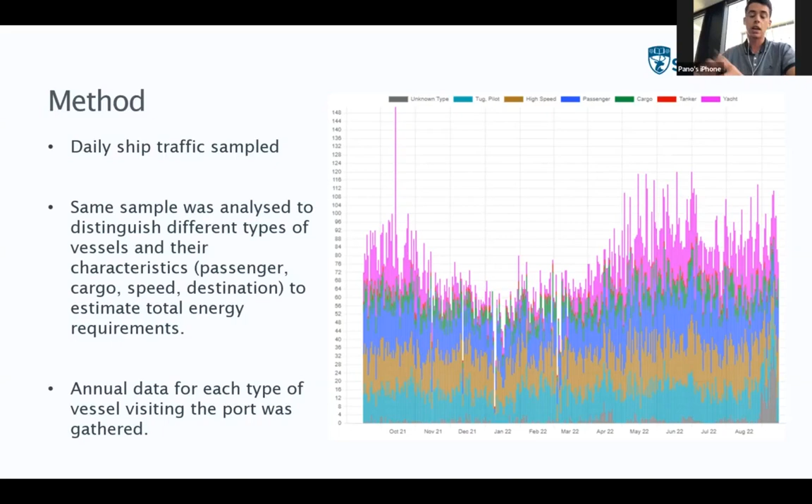So the results of that were that a prediction of 2.8 million tons hydrogen would be required to refuel every vessel that would come into port, assuming that refueling would undergo at every port stop. That mass fuel demand was translated into an average of 40 megawatts of electricity to power electrolysis. Again, locally, the proposed method of storage was with 2,800 meters cubed tanks within the port, and the main refueling method proposed was with small bunkering vessels as a way to avoid extensive costs for building separate terminals to refuel vessels. Plus, it would be a lot easier for smaller vessels as well as luxury yachts to be refueled while in the port of Southampton without having huge queues, I suppose.

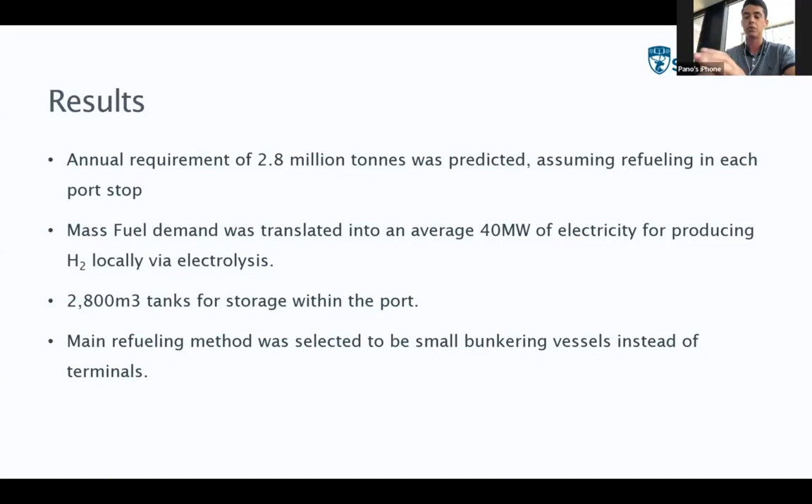Finally, one of the big projects that we've undertaken in the past was the design of a zero-emission liquid hydrogen carrier, with the main objectives being to develop a ballast-free hull, utilize the cargo as the powering source as a way to be zero emissions. Some of the challenges that occurred along the way were ship stability due to hydrogen being 6 times lighter than LNG, which resulted in a large weight reduction around amidship. How to power the return journey was also one of the challenges because, well, if there is no cargo on it once we reach our destination, then we should look and include different ways of propelling a vessel.

So in terms of ship safety, it is known that hydrogen will ignite at all ambient temperatures and at various air content ranges, as an indication between 4 and 74%. The finalized liquid hydrogen carrier was completed after 3 months and under close cooperation with industry specialists, one of them being Shell. And the main outcomes of that project were to develop a feasible ballast-free hull design. We explored the possibility of having large-scale hydrogen transportation and examined the possible shortcomings, main one being storage and insulation properties, since, well, hydrogen is stored at minus 250 degrees compared to LNG being stored at minus 160.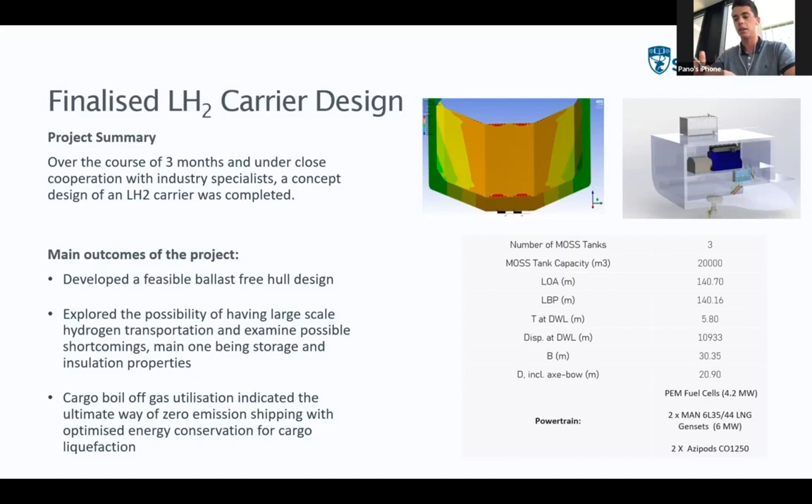In terms of concluding remarks, liquid hydrogen looks attractive as a potential future fuel for the maritime sector, even for long-distance shipping and large vessels. Hybrid fuel cell systems with batteries are likely to be more efficient and possibly the best way to move forward with new build vessels. Ensuring bunkering and liquid hydrogen supplies should be developed alongside future vessels to also ensure an effective transition towards hydrogen-powered transport. Of course, that was one of the main outcomes of one of the projects.

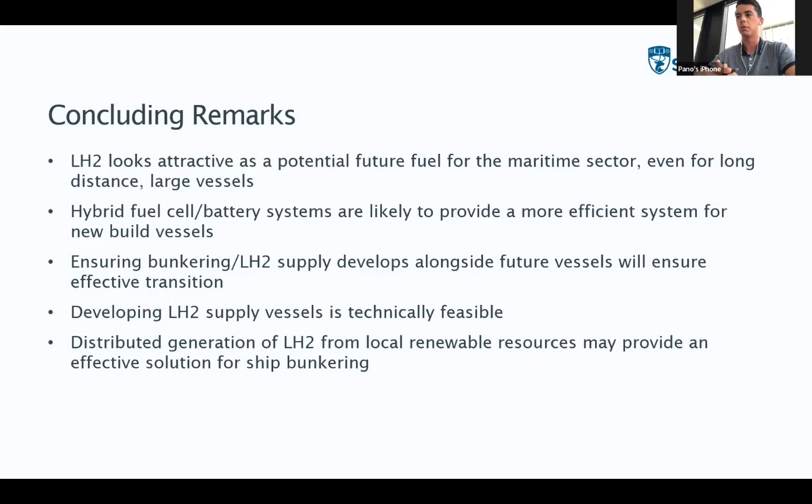It seems that it is technically feasible to develop liquid hydrogen carrying and supplying vessels. And finally, there should be a distributed generation of liquid hydrogen from local renewable resources, and that should provide an effective solution for ship bunkering.

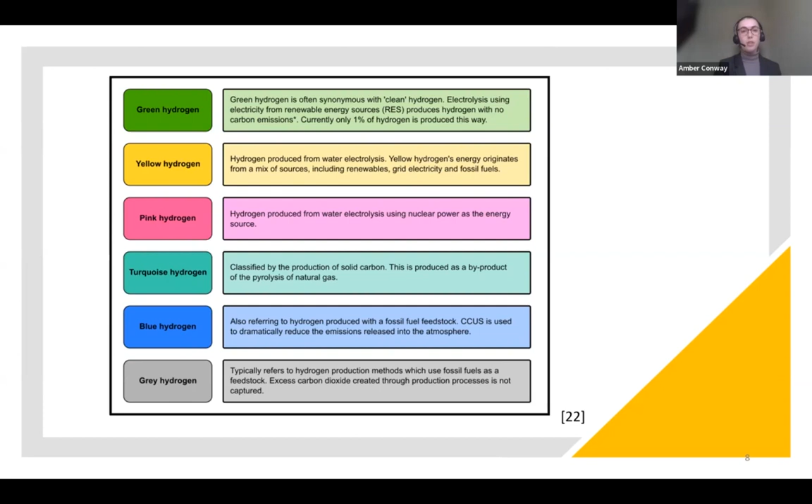So having given you a crash course in all the literature that has informed my study, I'd now like to move on to discussing the research gap which I decided to address. From the foundation of research, the gap that presented was regarding the demonstration of the effects of introducing hydrogen as an alternative fuel into the marine fleet, and the effect that the uptake of hydrogen in this sector would have on the demand for robust standards and the prioritization of these standards within the framework that could facilitate the growth of a marine hydrogen sector.

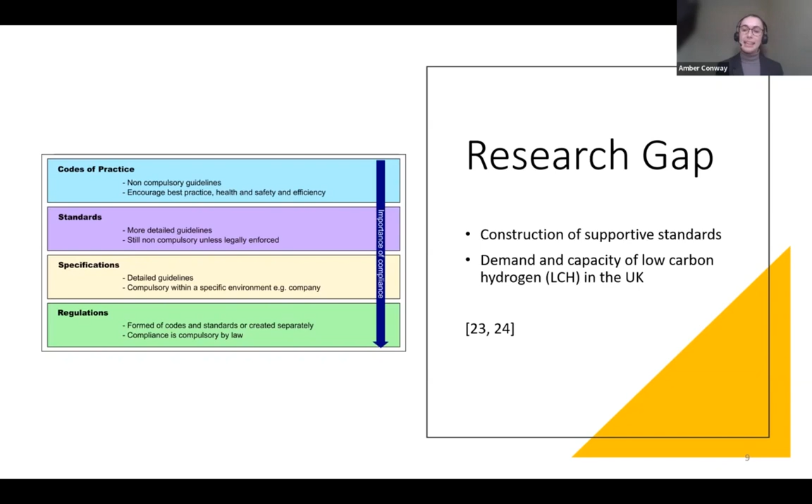And shown here is the explanation of how codes of practice, standards and specifications, and regulations interact in the hierarchy of how they function legally. So in order to conduct this project, I needed a pretty robust methodology. You've already seen the systematic literature review, which I conducted. To conduct this, I used key search terms. And then from this foundation, I was able to build an understanding of the standards, policies, and certification bodies that were involved in the industry, and of course, the state-of-the-art research.

Having established the research gap, it was possible to begin to consider scenarios of the uptake of hydrogen, ammonia, and methanol. It was really necessary at this point to focus on a subsect within marine vessels, and due to their large fuel consumption, which is 22% of total marine fuel consumption, and their expected growth over the coming years, container ships were chosen as the suitable group to focus on. 3 scenarios were designed, as I will describe in more detail shortly, to explore different levels of introduction of hydrogen within this subsect. Secondary qualitative scenarios were also introduced to test the assumptions that were made within the primary scenarios.

So within this presentation, I'm only going to highlight the key implications due to time. These will focus on the implications of the study which consider the realities of hydrogen production and the infrastructure within the UK, and include, as I just mentioned, the testing of assumptions made in the primary scenarios through secondary qualitative scenarios regarding the import of hydrogen and the use of internal combustion engines. And secondly, implications on the standards, in particular focusing on 4 stages of the supply chain, which are production, distribution, and bunkering and onboard storage.

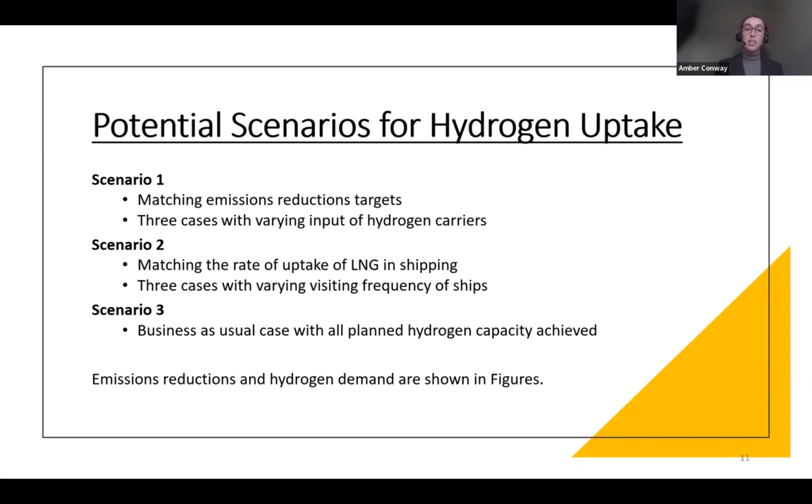Scenario 3 was the business as usual case, which was really important in providing context to the first two scenarios. This represented the emissions reductions potential of the current planned hydrogen production if the amount estimated by the Hydrogen Analytical Annex was apportioned to the marine sector and then proportionally to container shipping. So I will move on to show emissions reduction and hydrogen demand in the results section, but for now I'd just like to take you to the current UK hydrogen production. This shows the timeline for the business as usual case with all planned hydrogen production projects and targets available at the time of writing in May. So if all of these projects were seen to completion, this is the expected UK hydrogen production capacity year on year, increasing steadily.

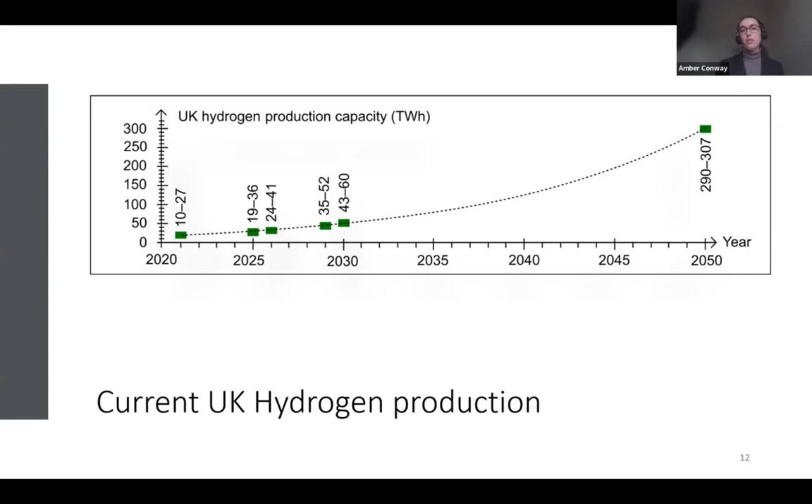However, since renewable hydrogen acts as a feedstock across the board, this is the driving force of the study, and renewable hydrogen is assumed to be the feedstock for all of these cases. Again, another basic of the study, also fundamental to the creation this time of scenario 2 and to the potential barriers of introduction of hydrogen, is the understanding of its comparison to liquefied natural gas or LNG.

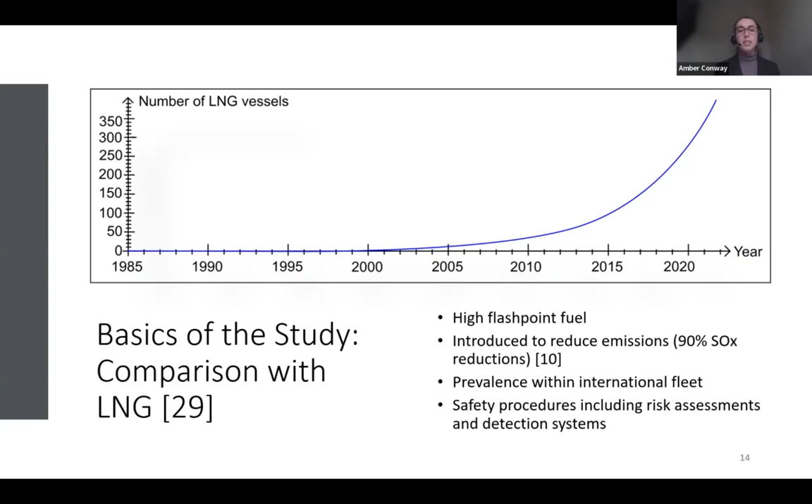So LNG is another high flashpoint fuel, which was also introduced to reduce emissions, in this case, particularly sulfur oxide emissions. LNG has continued to experience an increasing rate of uptake with over 350 LNG vessels in the international fleet today. And as such, it's really crucial that relevant safety procedures, including risk assessments and detection systems that have enabled LNG's successful introduction, are used to ease and accelerate, where relevant, the introduction of hydrogen as well.

So now the good bit, moving on to key results. So first, we're going to take a look at the individual scenarios. From scenario 1, the predicted emissions from the UK container fleet were seen to exceed target emissions reductions targets from 2023 onwards. This then implied that the first year of demand in 2023 would see 5.63 to 9.56 terawatt hours of energy demand to be fulfilled by hydrogen and its synthesis products, depending on the case.

Hydrogen demand as a feedstock was determined to be a constant ratio depending on the case of split between ammonia, methanol, and hydrogen. The cases were hydrogen only, equal energy contribution from each of the three fuels, and contribution based on current production levels, where hydrogen is produced in the highest quantity, but ammonia and methanol do not follow that equal split, as was explored in the secondary case.

So the latter assumed that current production levels implied a level of maturity in distribution and production infrastructure. So although there might not necessarily be immediate transfer of these production levels, you could see that the level of infrastructure might inform a tendency to lean more towards one fuel than another.

So scenario 2 actually demonstrated the current lack of feasibility for the high frequency visiting case of hydrogen ships. So this was the 40 trips per year when compared to the business as usual case, which I will discuss and compare further with some graphs to follow. So hydrogen uptake in shipping would currently really struggle to achieve the uptake rate previously demonstrated by LNG without major intervention. A much more tentative introduction would be expected without that.

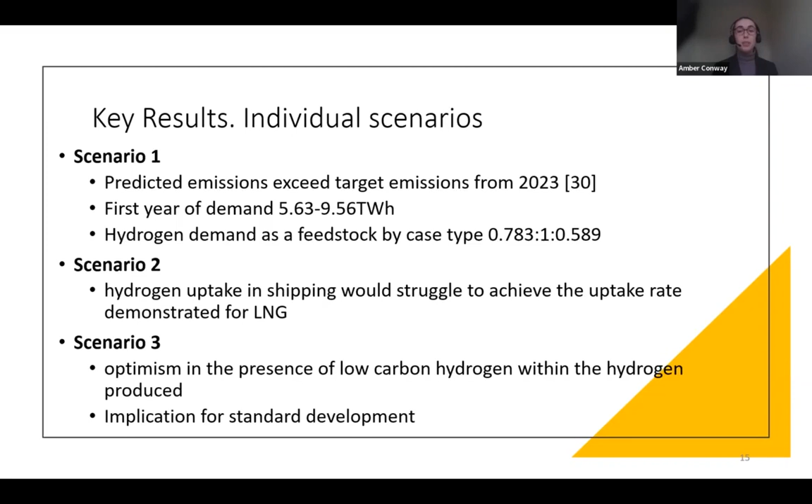So moving on to scenario 3, contrasting that with a bit of optimism. So scenario 3 offered real optimism regarding the hydrogen production levels, especially in the context of the ever-increasing interest in hydrogen within the UK and globally for a variety of different end uses. In order to harness this momentum we're seeing and see the use of hydrogen within shipping, particularly container shipping, standards need to be built up to support this and support the developments which we'll go on to discuss.

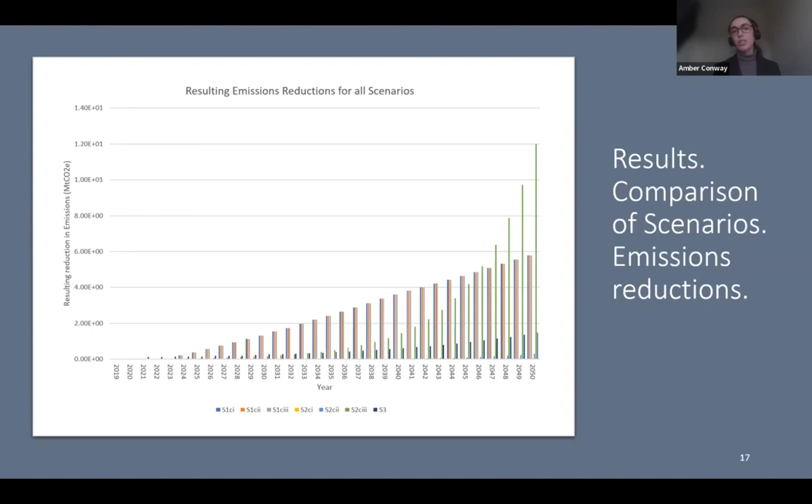And the green represents scenario 2, and 3 is represented again by the small blue, but steadily growing dark blue bar. The gap between target emissions reductions and reductions estimated to result from the business as usual case is 4.3 megatons of carbon dioxide equivalent. So in other words, just over a quarter of reductions needed would be achieved without significant changes to the current production plans using this study.

If we now look at the implications of the study overall, 10 megawatt of low carbon hydrogen production is expected from within the UK. So even looking at the production of hydrogen that incorporates all forms of hydrogen produced, we really need to see an increase in hydrogen availability to actually allow the scale of decarbonisation demonstrated by scenarios 1 and 2. The infrastructure requirements and technological development need to follow that as well.

So the potential for import could support this, with Norway, Australia, Spain, the UAE, USA, all looking to export hydrogen potentially to the UK. And depending on the low carbon status, this could really support hydrogen production domestically and could support the growth of the marine sector in using hydrogen as a fuel.

It's also important to consider that in this study, fuel cells were explored over hydrogen and dual fuel engines as they create zero emissions at the point of use. However, in the near future, engines would be best placed to dominate hydrogen fuel propulsion in marine vessels. And also to consider that hydrogen, ammonia, and methanol will not be the only emissions abatement technology within the marine sector, and they will be supported by a range of other developments, which will also help lower emissions and meet those targets.

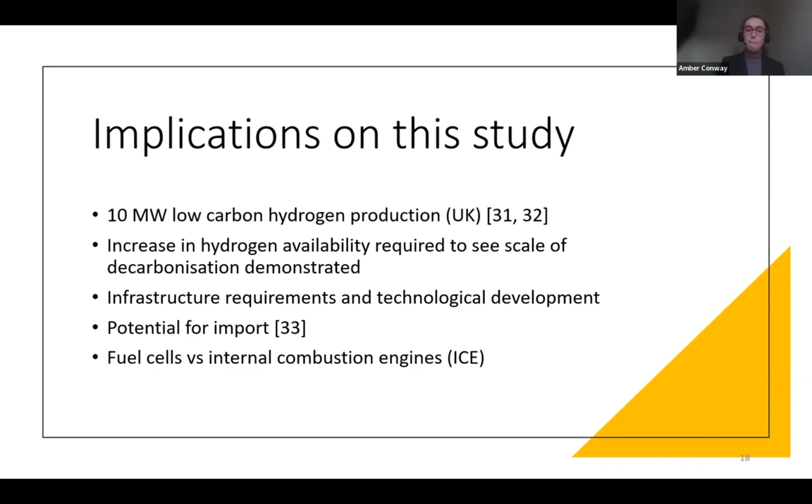So if we look now at the implications on standards, regarding hydrogen production, standards need to be defined and production needs to increase, particularly of low carbon hydrogen. Purification should occur at the appropriate stage of the supply chain, as it may occur due to liquefaction, which produces 99.9999% pure hydrogen, and production on board ships from ammonia stock is an additional possibility, and it would need to conform to the same purity standards as required for the end use in either fuel cells or internal combustion engines.

Regarding distribution, standards for pressurization, allowable leakage, safety distances and materials are required. Regarding bunkering and onboard storage, risk assessment and bunkering procedures may derive from existing standards for fueling stations, which we see with road transport vehicles. Onboard storage standards are underdeveloped, which is an area which needs looking at carefully over the coming years to support use.

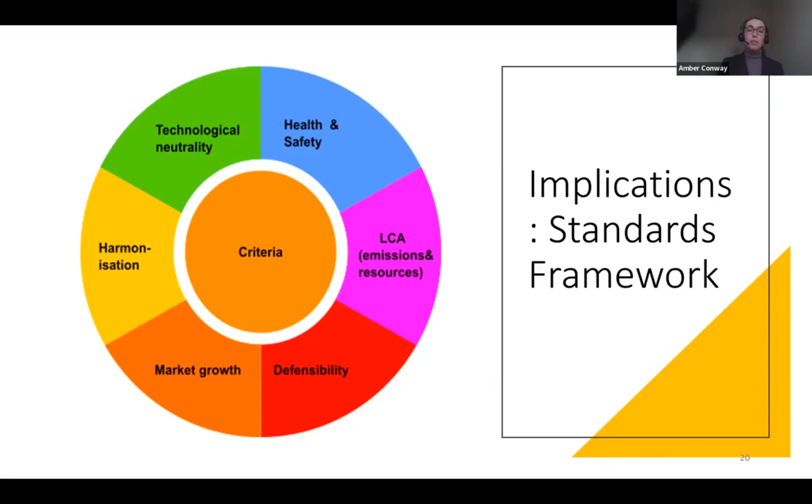So the standards framework in and of itself has priority criteria of health and safety, harmonisation, defensibility, enabling market growth, technological neutrality, and sustainability. So all of these need to really come together to produce the standards which will support and enable the use of hydrogen within the marine sector and enable the potential that we've seen throughout the previous slides. So in conclusion, we need to prioritise those criteria to create standards and unlock the large potential for hydrogen, ammonia and methanol as alternative marine fuels.

The demand for hydrogen from container vessels will far exceed current planned capacity. So production and distribution developments are not only necessary, but vital. The timescale of the uptake will depend heavily on this. And to accelerate the process, we will be able to minimise the emissions.